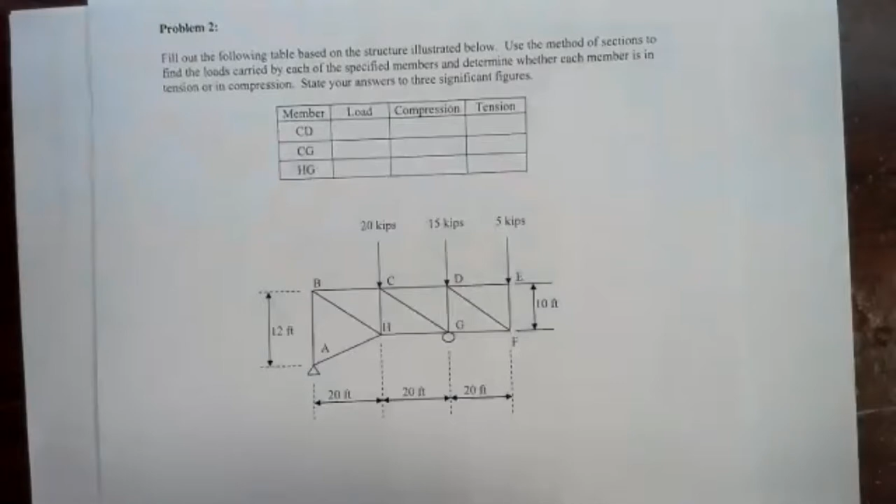It's not a bad idea to make a little mark through those, CD, CG, and HG, and figure out whether they're in tension or compression. So find out the load. We have something very specific here. It tells us to state our answers to 3 significant figures. So right away, that's a clue as to how many digits to round off to in our normal calculations. So as we're doing our calculations, we're going to want to keep 2 sig figs more than what we need in the end. So we'll keep 5 sig figs through the problem. So that's the problem to work with.

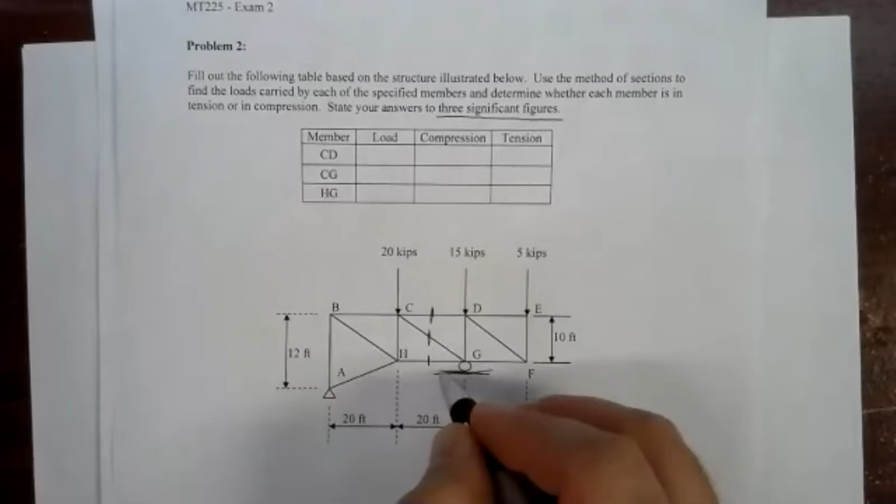Now, as you're aware at this point, I like to throw in problems that look a little bit different, but that are treated by the same exact methods we're already familiar with. The thing that looks a little bit different here, something we really haven't seen before, is that apparently the supports are on different levels. And that's okay. We could have a kind of a step or something like that here that this is on. That doesn't really change how we do the analysis of the problem. We can assume those supports are sitting on some sort of ground level or some sort of ground support. Doesn't change anything about how we do the problem.

So let's go ahead and start with the external problem. We need to find our reaction forces at A and G. So we'll start that with a free body diagram. So free body diagram, it's going to look something like this. Scale might not be quite right, but it's close enough to get the point across. So we've got joint A down here, then we've got B, C, D, and E, G, and H.

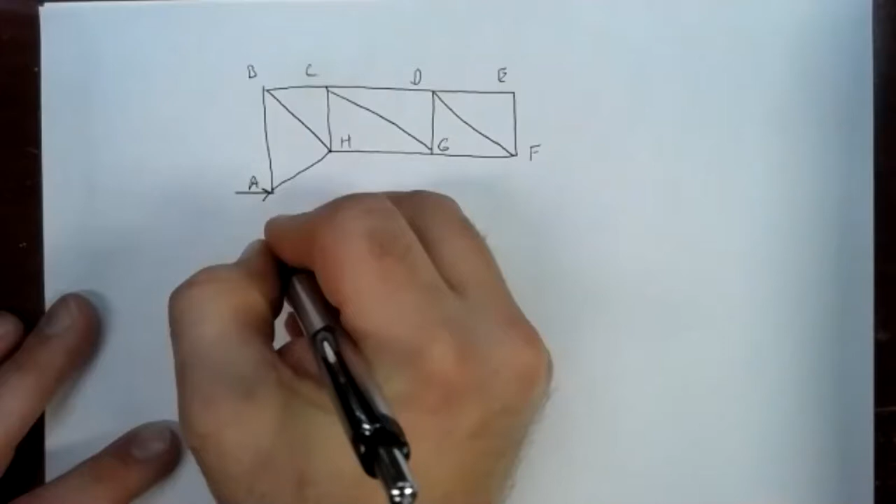We've got a pinned support down here at A, so that means we're going to replace it with 2 forces, RAY and RAX. G is a roller support, so we're going to replace that with a single vertical support, RGY. Then we've got these other external forces: 5 kips over there, 15 kips here, and 20 kips there. No other forces involved. We had a 10-foot distance here. This whole thing overall is 12 feet. And then each bay is 20 feet. So yeah, the scale is a little bit off, but we'll figure it out here.

So we start out our external problem with our sum of forces in the x direction. The only force we've got in the x direction is RAX, and that's equal to 0. So we automatically know RAX isn't there. Sum of forces in the y direction, we've got a positive RAY, we've got a positive RGY, and then we've got all these forces pushing down. We've got a negative 20, negative 15, and negative 5.

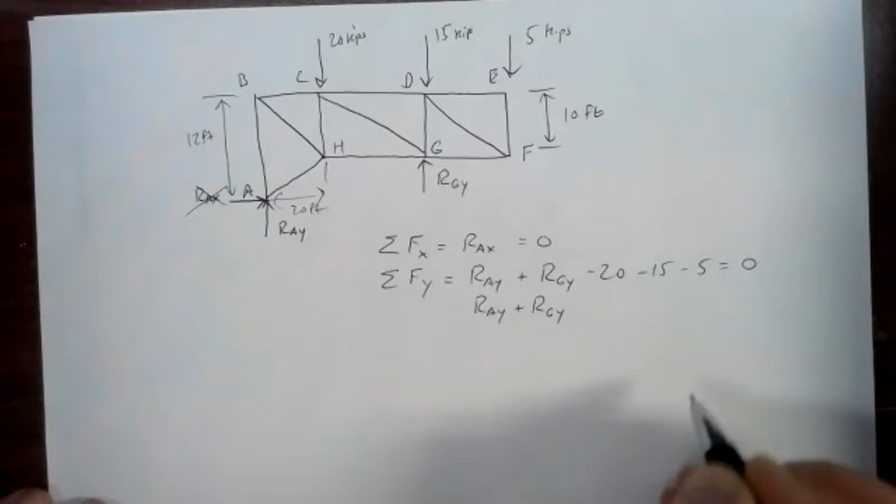So that's got to be equal to 0 if this whole thing's in equilibrium. If we simplify that down, we've got RAY plus RGY minus 20 minus 15 minus 5, a negative 40. So we have RAY plus RGY minus 40 is 0.

Now we need moments, and we need to pick a pivot point. Our traditional pivot point here, picking point A, ought to work with no problem. So we'll pick A as our pivot point. That means RAY will not have a moment, but all the other forces that are still there will: RGY, the 5 kip, the 15 kip, and the 20 kip force. All of those have an arm, the distance between the pivot point and the line of action of the force.

Working left to right, let's take that 20 kip force first. That 20 kips is 20 feet away, so we have 20 times 20. If we're pinned at A and pushing down at C, that'll cause a clockwise rotation. From our coordinate system, counterclockwise moments are positive, so clockwise moments are negative.

We've got our 15 kip force. That's 40 feet away, it's 2 bays away. So we've got 40 times 15. Pushing down at D, that's still going to cause a clockwise rotation about A, so that's negative.

We've got 5 kips, 60 feet away. That's also going to be negative. Pushing down at E will cause a clockwise rotation.

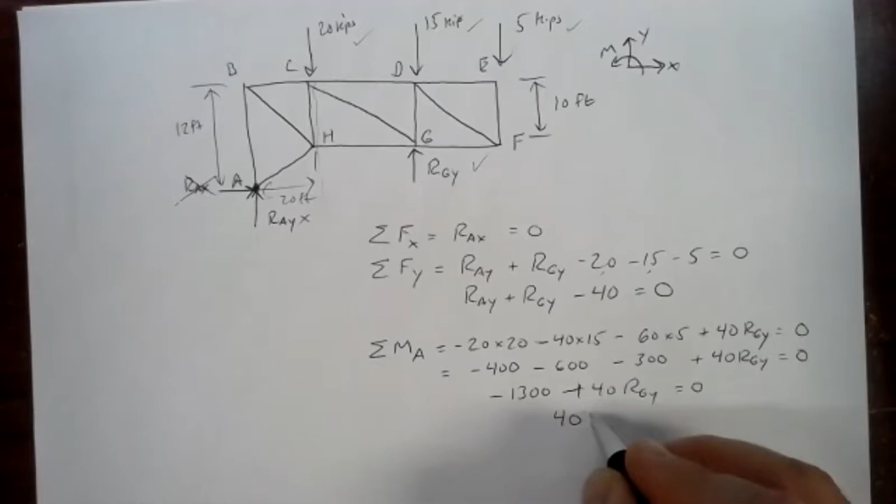40 RGY equals 0. Add 1,300 to both sides, and we have 40 RGY equals 1,300. Divide both sides by 40, and RGY equals 32.5. Since all of our forces were in units of kips, we have 32.5 kips. So that's what RGY is pushing up with.

Seems reasonable. It's on the same kind of order as our applied forces, 20 kips, 15 kips. We've got 40 kips pushing down, so it makes sense we'd have something around that pushing back up, since most of them are concentrated pretty close to where G is.

To figure out A, we can go back into our y direction equation. We have RAY plus 32.5 minus 40 equals 0. So that will tell us that RAY must equal 7.5 kips, since RAY plus RGY, the forces pushing up, need to equal the forces pushing down. So 32.5 kips plus that 7.5 kips gives us the 40 that we need.

So those are our reactions. That's the external problem, first step in doing the method of sections.

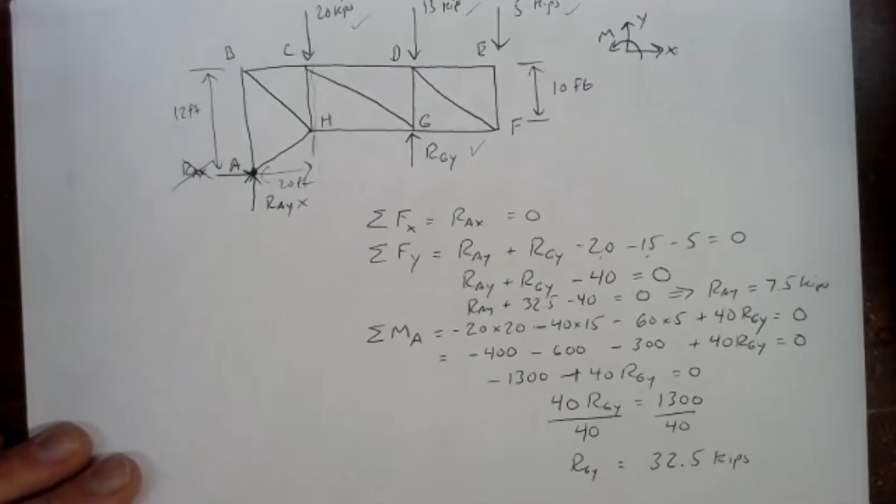If we go back over to the picture, now that we know our reaction forces, we have to decide how we're going to close this loop. We're going to be able to cut through all three members that we want in one pass, in one cut. But we've got to close that cut either to the right or to the left. Either way can work, either way is fine, either way should give you the same answer. If you do all the math right, it has to give you the same answer. It can't depend on how you solve the problem.

If we close to the right, we're going to be dealing with this 15 kip force, the 5 kip force, and RGY. If we close off to the left, we're only dealing with two forces, the 20 kip force and RAY. So closing off to the left seems to be a little bit easier here, just a little bit, it's marginal.

So that little section of the truss that we're cutting out is going to look something like this. If we draw a picture of the part inside, we've got that section from A to B, we've got A to H, we've got B to C, and we've got C to H.

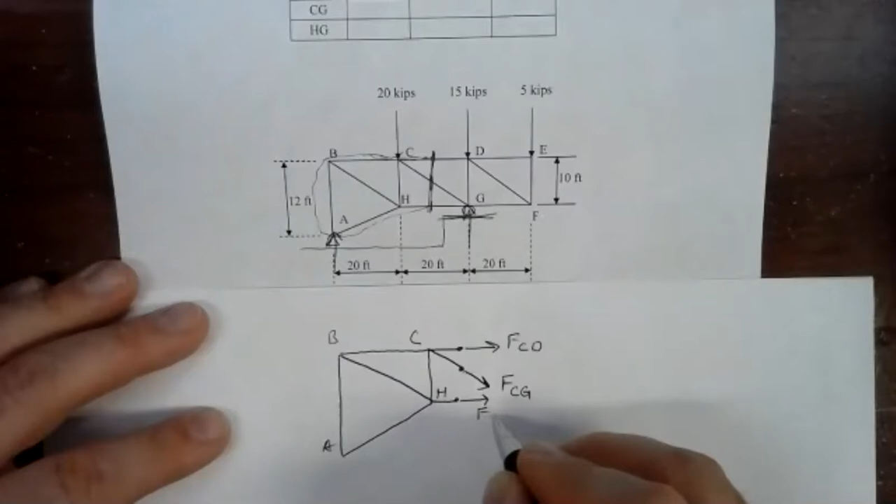And then we've got where we cut through GH, FGH. We're going to need an angle, we need that angle there. But fortunately, that's not too hard to find.

If we go back up to our picture, each of these triangles is 10 feet high and 20 feet wide. So since we're looking for this angle right here, opposite over adjacent, we do inverse tangent of 10 over 20, opposite over adjacent.

So we do inverse tangent, and we get 26.565 degrees. So that's the angle there.

26.565 degrees. One of the recurring problems I've seen in looking at the homework is people messing up sine and cosine when you're looking at opposite and adjacent. Make sure you're looking at that carefully.

If you decided you wanted to work with this angle down here, that's fine, but you're going to get the complement to 26.565. You'll get 63.435. And it's fine to work with that. Just be aware that when you want your y components, you're going to need to use cosine, because the cosine goes with the adjacent side, and the adjacent side to that 63.435 angle is the y side.

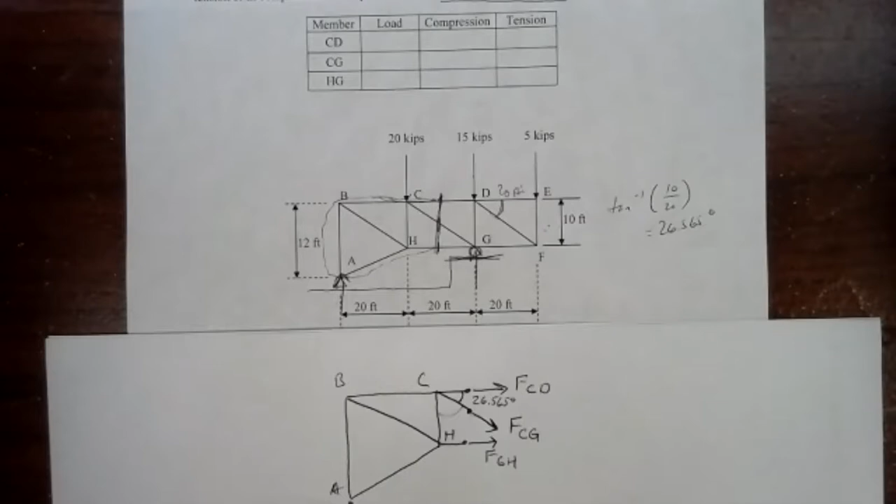We've got our force here also. We've got that 7.5 kips right there at A. So there's our free body diagram of the part of the truss isolated by our bubble. Don't forget the 20 kip force here. Always a good idea to go back before you do your analysis and make sure you've caught all the forces.

So I've got that 20 kip force at C. I've got the 7.5 kip force at A, my reaction. No RAX because there were no side loads. And I've got my 3 unknown forces. So it looks like we're good to go.

So let's do our sum of forces in the x direction. We've got all of FCD to the right, and to the right is positive, up is positive, and counterclockwise moments are positive. So we have positive FCD. We've got all of FGH, and we've got a piece of FCG.

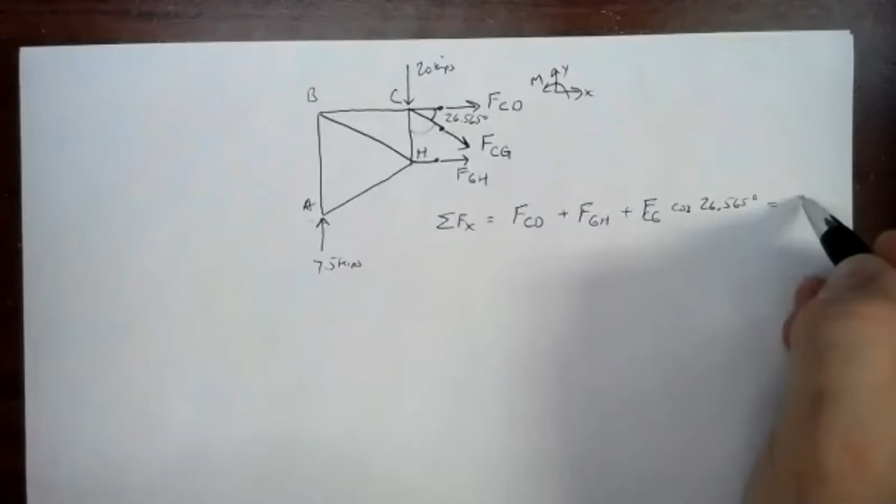Now, since I've decided I'm going to use this 26.565 degree angle, and the x component is adjacent to that, adjacent's going to go with cosine. So I'll have FCG cosine 26.565 degrees. And that's pulling to the right, the x component's to the right, so it's positive. No other x components involved, so that's all we've got for our x component equation.

For the y direction, we've got a positive 7.5 kips from our reaction at A. We've got a negative 20 kips from the applied load at C. And then we've got the piece of FCG pulling down. And since that's the opposite side, that's going to go with sine. And since it's down, it's going to be negative. So negative FCG sine 26.565 degrees. That's all I've got in the y direction.

And then we've got our pivot point. We've got to do our sum of moments about a point. And the easiest point to pick in this case is going to be point C, because it's going to knock out FCG specifically, because that one's the one that's got a hard moment to figure out about any of the other points. Point C is about the only place where we've got a nice simple moment for FCG, that moment being 0.

It'll also knock out FCD and that 20 kip force. The only forces that will have moments will be FGH and the 7.5 kip force.

So if we use joint C as our pivot point, FGH has an arm. According to our drawing, if we go back to that, FGH is down here, the pivot point's there, the line of action's down here, the arm is that distance between the pivot point and the line of action of the force. That's 10 feet. So we have 10 FGH. If we're pinned at C and we pull to the right at H, that's a counterclockwise moment, so that's positive.

Then we've got joint A, which is at 7.5 kips. Joint A has an arm that is 20 feet away from C. If we go back to the picture, we can see that here. Right here is A. The line of action of A is right there.

Pivot point's right here. I'm still seeing a little bit of confusion with that, with some of the forces. So if you got that wrong on your homework, got something wrong with an arm, make sure you're paying very close attention to that. It's an easy way to make a small mistake that just messes up the whole problem.

So got to get those arms right. Each bay is 20 feet wide. So A, the line of action of A is 20 feet away from C. So we've got 20 times 7.5. And if we're pinned at C and we push up at A, that'd be a clockwise rotation, so negative.

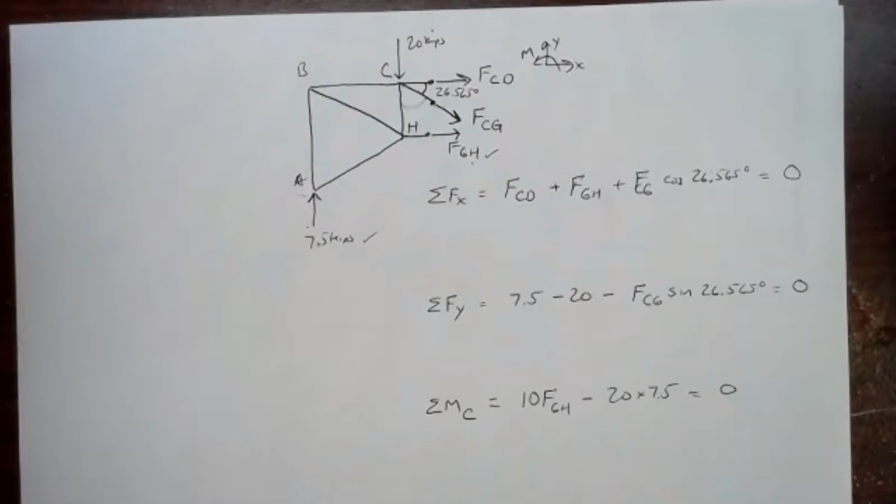Now, as it usually works out, the moment equation's easy to solve. We've got 20 times 7.5, that'll be 150. So we get 10 FGH minus 150 equals 0. Add 150 to both sides, and we have 10 FGH is 150. Divide both sides by 10, and FGH is 15.

So member GH came out to be 15 kips and came out positive, which means our assumed direction is correct. The rest of the truss really does pull on member GH. That means it's putting member GH into tension.

So if we go back to the chart, we can fill that in. We know we're in tension, and we've got 15 kips.

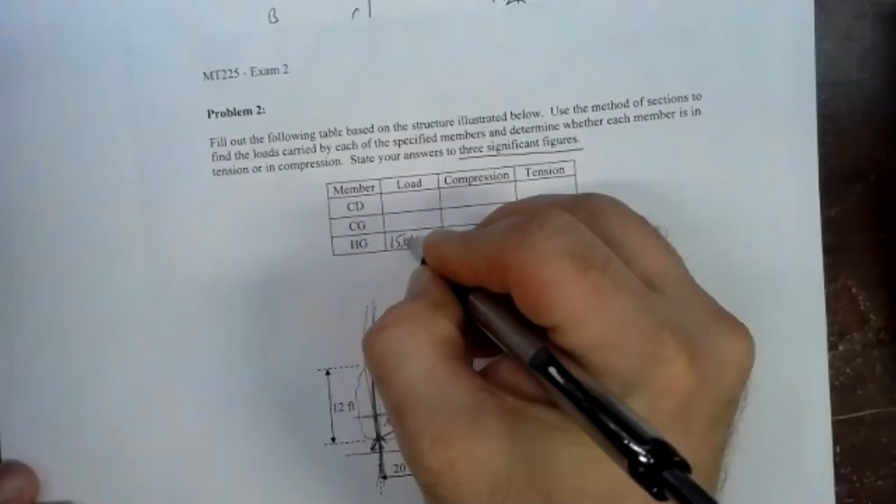Now, we can be careful here because that's the final answer. For that, we need that to 3 sig figs. To make a 15 into 3 sig figs, we do 15.0. It's kind of picky to do that because we really haven't done any round off at all. This is actually an exact answer up to this point, but to meet the objective of the problem, we'd write it as 15.0 kips.

And be careful, the ones we write up on our own, I usually put the units up in the header of the table. That's not there, so make sure you put the units in or make a note somewhere, cross that out, and write loads in kips or whatever you need to do to communicate the right units. If you just leave it blank, I'm going to take off points. So 15.0 kips in tension.

So we got 15 kips there for GH. We go up to the y direction equation. We can solve that, and we can simplify it a little bit here first. 7.5 minus 20, we've got negative 12.5 minus FCG sine of 26.565 degrees. That's equal to 0.

If we add 12.5 to both sides, we'll get negative FCG times the sine is positive 12.5. Then we divide both sides by negative sine of 26.565 degrees. The negative will cancel out the negative sign there, giving us a positive FCG. That's what we're always solving for, and the signs will cancel each other out. So be careful to watch those sign signs, because those can cause problems for you too.

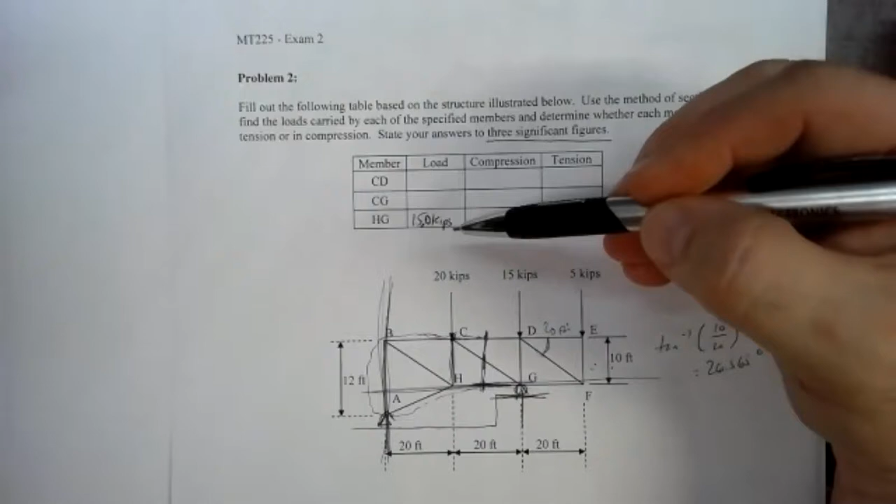Now, that being said, when you look at filling in your table, we never put negative values in that load column. The load is an absolute quantity, it's how much load is there. We use up any negative signs there are when we interpret tension or compression. So that it's negative tells us that member CG is in compression.

Remember, in method of sections, as long as you set it up the way that I've shown you, if the answer comes out positive, it's tension, and if it comes out negative, it's compression. So tension and compression are as simple as interpreting the sign when you are working with method of sections. We all know method of joints is a little more tricky.

We can fill in the table here, and we can go ahead and round. As long as we don't use the rounded value in our final calculation here, we can go ahead and round this to 3 sig figs. And to 3 sig figs, this would be 28.0. So 28.0 kips filled into the table.

So finally, we can go and do our x direction equation. We can fill in what we know, including the signs. The value of FCG is a negative number. You have to plug that in to the equation, including the sign. We can interpret the sign away when we fill out the table, but when we're solving equations, we've got to include that sign. We can't just drop it.

So let's fill in what we know here. We don't know FCD. FGH is a positive 15 kips. FCG is a negative 27.951 times cosine of 26.565 degrees. If we take 27.951 times the cosine of 26.565, we've got 25.

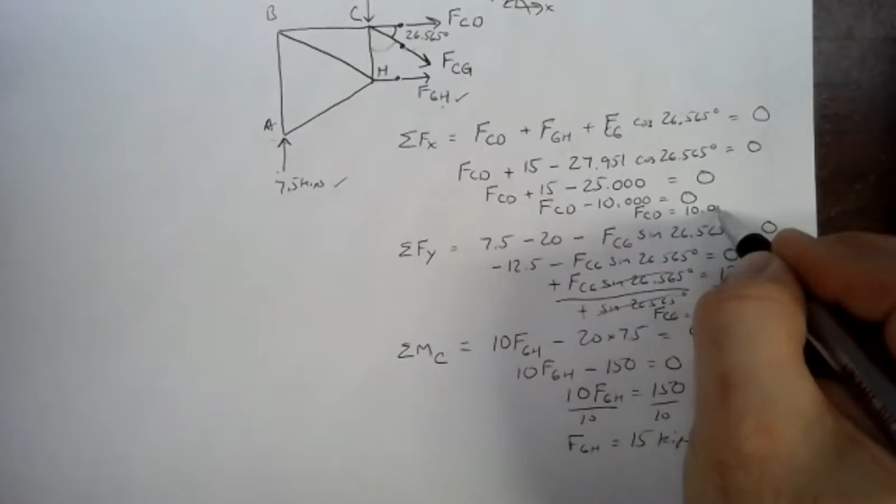So this is FCD plus 15 minus 25.000. 15 minus 25 is a negative 10. So we have FCD minus 10.000 equals 0. So if something minus 10.000 is 0, then that something must be 10.000. So FCD is a positive 10.000 kips. So that means that member CD is in tension.

So let's go over to the table here. Member CD, we can fill that in now, rounded to 3 sig figs. And that came in tension.

Is it acceptable if we just write kips over top of load? Yeah, anything that clearly communicates what your units are is fine by me. Okay, just making sure. About the only time I end up taking off points for units is when they're just not there at all, where there's just no indication of it. I even get pretty lenient on it when it's shown in the work, but you didn't put it in your final answer. As long as I could see it in the work, at least tells me you knew it at some point. But if they're just completely gone, then I can't do anything with that. Understood. But as long as it's clearly communicated.

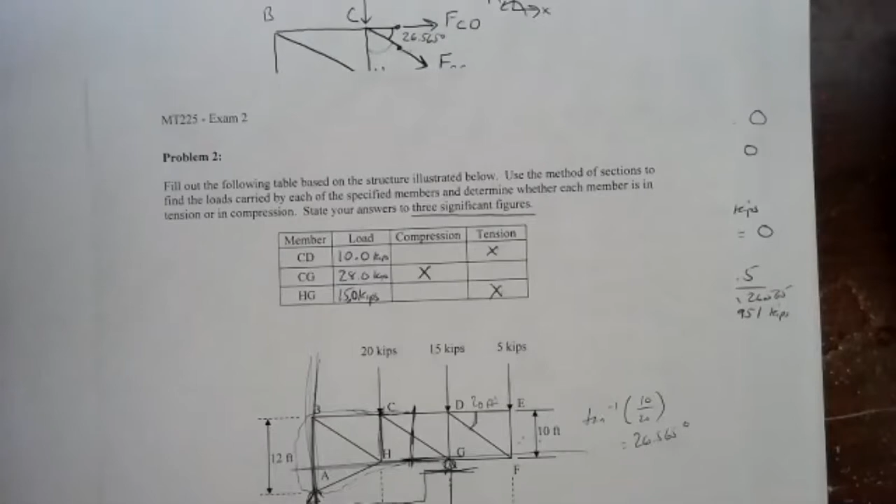So for our loads, we should always keep it positive, right? As long as we indicate which is tension and compression. Yep, the sign factors into tension and compression. The load is an absolute quantity. It's considered a magnitude. So in a sense, you could think about this as a vector representation, where compression or tension is telling you about direction, and the load is the magnitude. So the magnitudes of vectors are always positive. Okay. Makes sense there? Yep. All right, any questions on that one?

Now this one's got kind of a complex load on it, to be able to get essentially both the top and bottom to be in tension like that, CD and GH. You've got some load over here that's trying to bend the part of the truss here between A and G, trying to bend that down. So that's going to stretch out GH, but it would tend to put CD into compression. But then you've got this 5 kip load over here, which is trying to bend everything this way, trying to stretch out the top. And it's far enough away that it can actually win and be able to turn that top from compression to tension, but not really have an effect on what's going on down here.

So this isn't a pure bending state. In a pure bending state, you'd either have just tension on the top and just compression on the bottom, or vice versa. Here we've got something that's kind of twisted around, where it's got some bending in one direction on one part, so it's kind of bending like this over here, but it's bending like this over here. It's kind of a strange load on the system, so it's not the easiest one to try to just guess the tension and compression status on.

All right, any other questions on exam 2?

So is that pretty typical for the exam to have just 3 questions? Yeah, sometimes I've gone with 4, where I've done kind of a method of joints, method of sections, frames, and then kind of like student's choice. So here's a truss, do it however you need to. But that's been pretty rare. So I think 3 is pretty standard here, and you can expect the lines that they're going to go along. Method of joints, method of sections, and a frame problem.

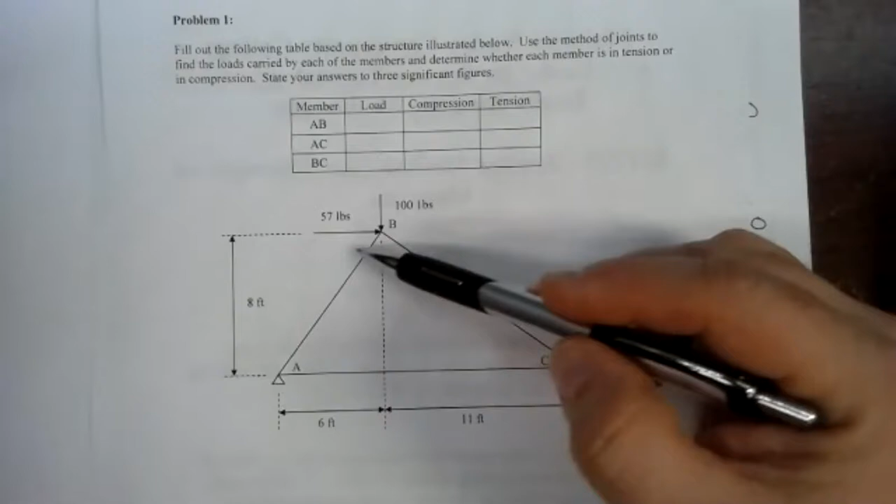Do you think it's beneficial for us to just go over all 3 then? It's probably not a bad idea if you've got questions on them. I mean, if everyone here is feeling perfectly fine with method of joints, this one is a typical 3-member method of joints problem. About the only thing I think that would immediately trip people up, or that I'd expect to see errors on, would be people forgetting about this 57-pound force in their moment equation. They're used to thinking about those gravity loads, but those side loads, like this could be a wind load or something like that on a roof truss. I mean, I could certainly do them, I'll run them through if you want. But if everyone's feeling perfectly comfortable with something, I'd rather spend time on things that you're not feeling as comfortable with.

But if no one has any other suggestions, I'd be fine with that. I'm good with whatever. All right, hey Tom, go ahead.

All right, let me scrap my pages here and get to some fresh scrap paper. There we go. All right, so here we've got problem number 1.

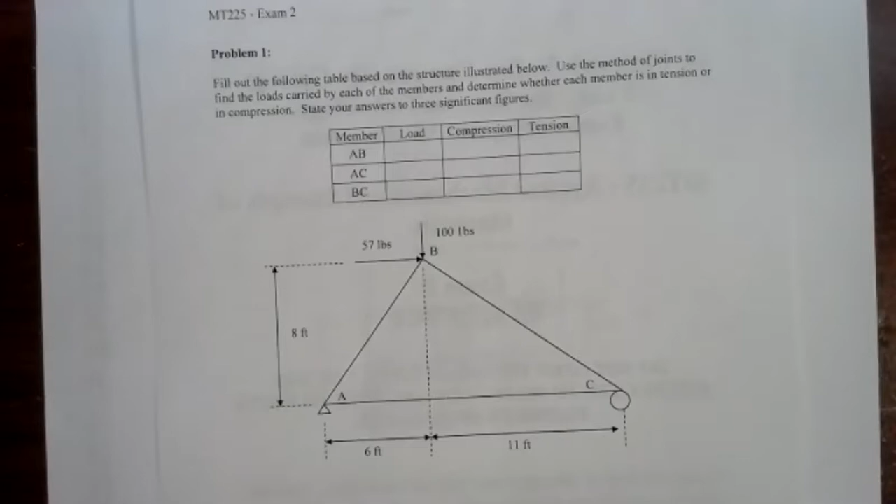By the way, you can probably expect a pretty reasonably equal distribution of points on the exam. If there are 3 questions, chances are I'd probably go 40, 40, and 20. I'd probably weight the method of joints and method of sections heavier because those are really the most important concepts to be getting out of the class. The frame would probably be weighted a little bit lighter. That'd be my first instinct on it. So somewhere in that neighborhood, 40 points for each of those, I forget what it is. You can check in the solutions, as those are posted for exam 2, for the old exam 2, and see what my point breakdown was. But that'd be pretty typical, at least from what I normally would do.

So let's take a look at this one here. We've got a 3-member truss. It says to use the method of joints, which you really don't have a lot of choice of. Try doing method of sections on one of these sometime, on the 3-member truss, and you'll see pretty quickly why you don't end up doing method of sections on these, because it breaks down into method of joints. When you can't cut through 3 members in one cut, you're just doing method of joints. So you end up with basically the same problem. So we may as well use the method of joints on this.

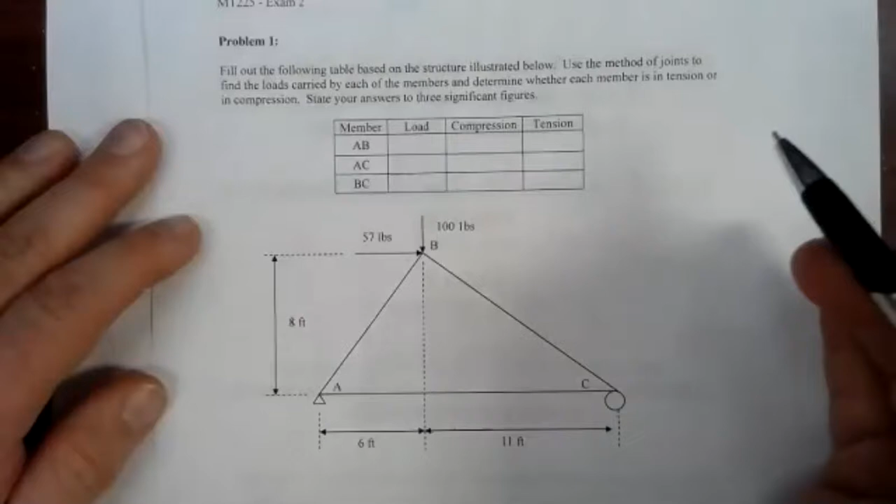Determine whether each member is in tension or compression, and state answers to 3 sig figs. So same procedure as with method of sections. First, we've got to do the external problem. So let's sketch our free body diagram.

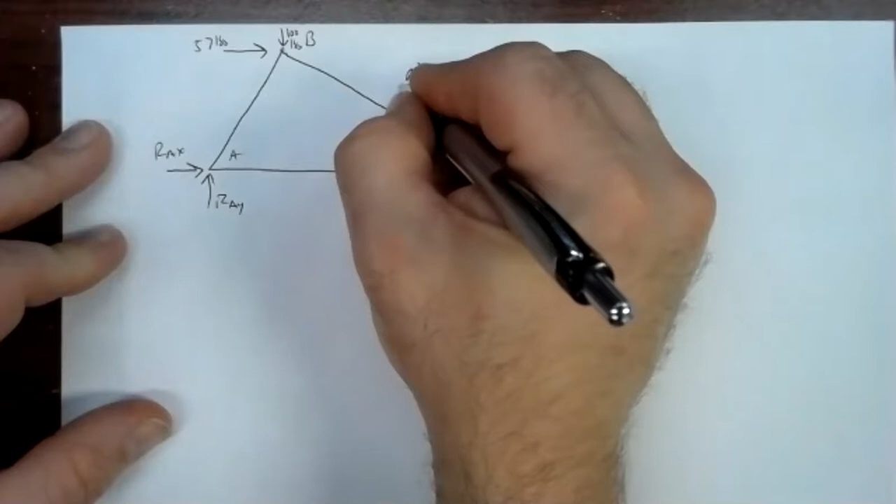So up here at joint B, we've got a 57-pound force and a 100-pound force. 57-pound force to the right and a 100-pound force down. Joint A is a pinned support, so we can replace that with two forces, RAX and RAY. And then over here at joint C, we've got a roller, so vertical RCY. To the right is positive, up is positive, and counterclockwise moments are positive.

So we'll do our sum of forces in the x direction. We've got a positive RAX by assumption, and then we've got a positive 57-pound force. That's given to us. No other x direction forces, so that lets us make a solution right away. RAX is negative 57 pounds. So that means I guessed the wrong direction down here. I assumed RAX was to the right, but it's got to be to the left, which makes sense. We've got a force pushing to the right, so there's got to be something going to the left to counteract it. And we'll correct that when we draw our next free body diagram.

We'll do our sum of forces in the y direction. We've got a positive RAY, a positive RCY, and a negative 100. The best we can do with that is just add 100 to both sides and get the same y equation we normally get, which says that the two unknown forces pushing up had better total up to be the total forces pushing down. But we can't solve that yet, too many unknowns.

So then we'll take our sum of moments and we'll pick A as our pivot point. Sum of moments about A. RAX and RAY will not have a moment because they're both pushing on A. But RCY will have a moment, the 100-pound force will have a moment, and that 57-pound force, that troublemaker 57-pound force, will also have a moment. Anything that's got a line of action that doesn't pass through A, that's going to have a moment. So we're going to have three terms in our moment equation. Now, RCY, according to the drawing, is 17 feet away.

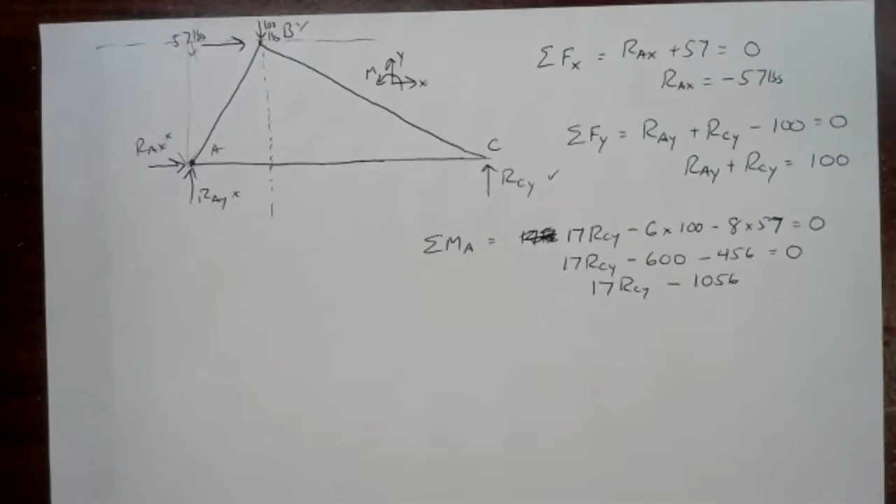Combining that together, we've got 17 RCY minus 1056 that equals 0. If we add 1056 to both sides, we have 17 RCY is 1056. Divide both sides by 17, and we get RCY is 62.118. The units here are pounds.

So we've got 62.118 pounds pushing up at C to support this structure. Knowing that, we can go over to our y direction equation.

We've got RAY plus 62.118 is equal to 100. Subtract 62.118 from both sides. We've got 100 minus 62.118, and that gives us 37.882. So RAY is 37.882, also pounds.

So there we've got our reactions nailed down. Got to make sure to translate all of them over. Don't ignore that X direction. Another very common mistake I see people make is they get so used to doing problems that just have gravity loads in them that they completely forget about RAX and drop it out of the problem. That's going to mess things up. So we've got to have all three of those reaction forces carried over into our intermediate free body diagram.

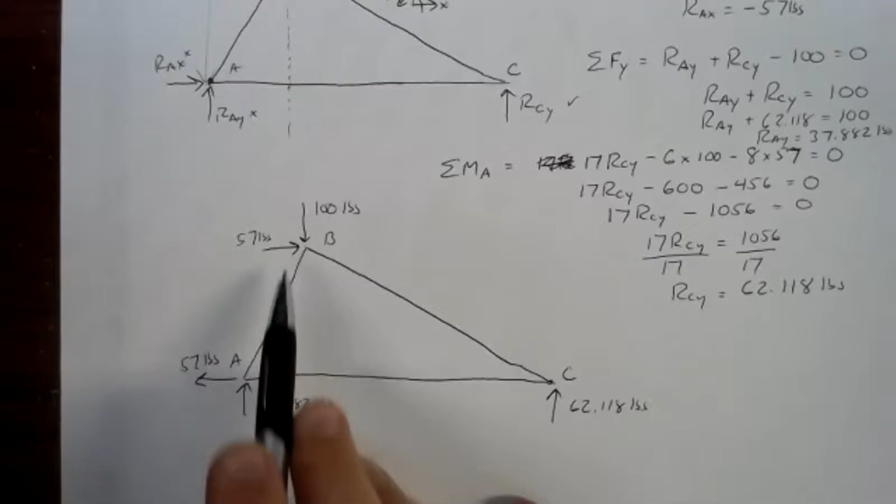In fact, we do this kind of thing all the time where we use forces in kind of strange directions to shift a load. Those of you who might be a little more familiar with towing vehicles might have heard of something called a weight distribution hitch. It works in a very similar way, where we're using a side load to shift essentially how that tongue load is balanced out on the vehicle.

So let's go into the method of joints here. It's almost always a good idea in these kinds of problems to work on these support joints, mostly because we've got this unknown that's horizontal. Working with unknowns at angles means we're taking sines and cosines of unknowns, and that makes the algebra more complex. Having one of those is bad enough. We want to avoid, if we possibly can, working on a joint where we have two unknowns with angles involved, because we'd be taking sines and cosines of different angles, and that's just ugly.

In 2 dimensions, we should always be able to find, unless I were to go and create some really nasty structure, some joints that are easier to work than others. So it's up to us here whether we work at joint A or joint C. If you remember the rule I gave you a little earlier, when you're working with a method of joints problem, you're always going to have to solve one fewer joint than the number you've got.

Here we've got 3 joints. I'm going to have to work with 2 of them. And so I don't want to work with B, so that means I'm going to work A and C. So just out of habit, I'm going to work A first. C might be a little bit easier, just because it lacks that other side force, but since we have to work both of them anyway, we may as well. So let's go over to joint A.

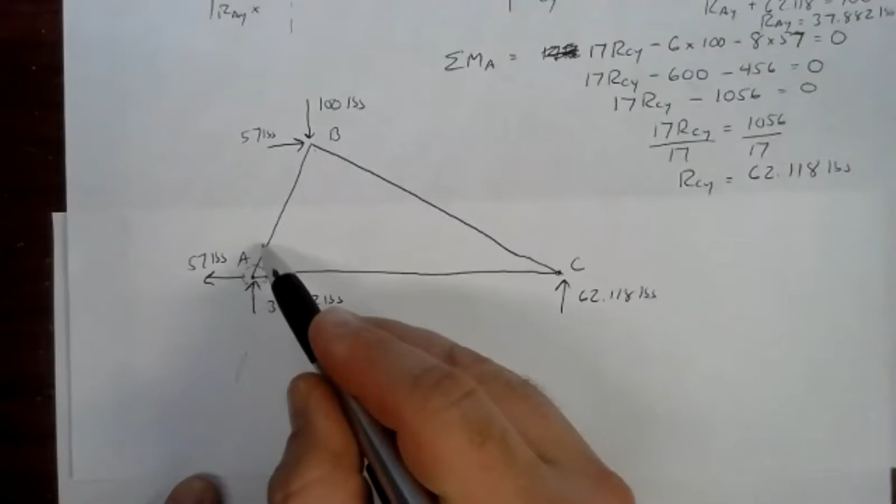We're going to draw the free body diagram at joint A to make sure I don't make a stupid mistake and ignore a force. I'm going to draw my little bubble around A and make sure I count up how many forces are acting there. I've got 4 forces: the 2 reaction forces, and these 2 unknown forces. So I should have 4 forces in my free body diagram.

I always like to draw the forces as if they're pulling. So rather than pushing up with this 37.882 pounds of force, I'm going to pull up with 37.882. I always draw my known forces in first. That makes it a little easier to figure out reasonable directions to draw my unknown forces. So those are my 2 known forces.

Then I've got to fill in values for this unknown force on the joint due to member AB, and the unknown force on the joint due to member AC. Now it makes sense here to draw the force due to AC pulling to the right. It's just easier to draw that way rather than drawing it on top of the 57-pound force and run the risk of losing it. When you've got two arrows drawn on top of each other, they often start to look like one arrow, and then you make mistakes pretty easily.

That also gives me a better idea of where to put AB. If I drew AB pulling up and to the right, that wouldn't be reasonable because there'd be no forces down. And to be in equilibrium, for every force to the right, there's got to be a force to the left. For every force up, there's got to be a force down. So here we've got member AB's force. I'm going to draw that as down and to the left. And that should be, I've drawn it kind of not quite at the right angle here, but I've got the down to the left going here.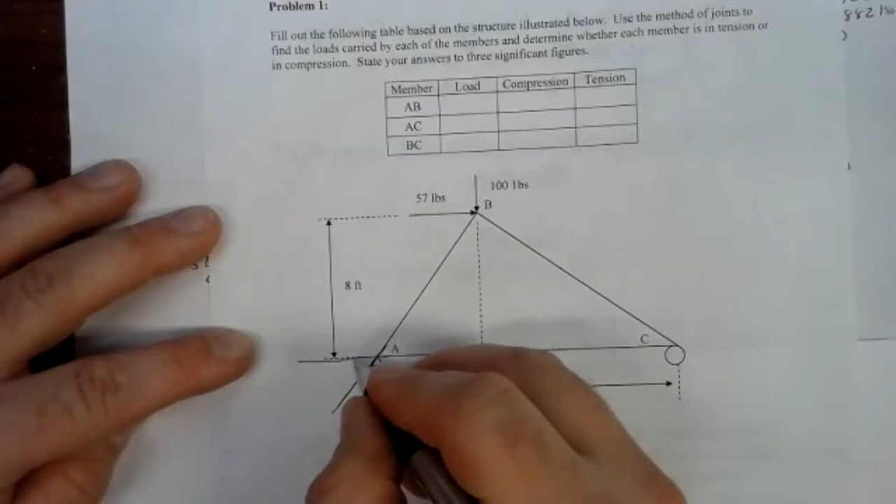We need the angle, and you've got to be careful with these angles. Sometimes it'll help to go back to the drawing, maybe even back to your original drawing, and sketch out what those angles are. There's the extended line for member AB and for member AC. That angle right there, the one to horizontal, is the one that I want. Fortunately, those two angles are the same. We call them vertical angles when they are across the X that way, and they are across an X. That is, those two angles have to be equal.

Well, we can get that angle pretty easily from this triangle. We've got 6 feet there, we've got 8 feet there. So our angle is going to be the inverse tangent of opposite over adjacent, 8/6.

There have been several times in a lot of the homework assignments and such that I saw people submit in quizzes where people have gotten the complement. They've gotten the angle on the other side, gotten the angle to vertical. And that'll work as long as you use it in the right place. But what I most often see is the angle drawn to horizontal, but the angle calculated to vertical. That's usually flipping over the order here. So pick the angle you're working with. Opposite over adjacent will give you the angle.

So inverse tangent, that's 53.130. So that's my angle here, 53.130 degrees. So there's my free body diagram for joint A.

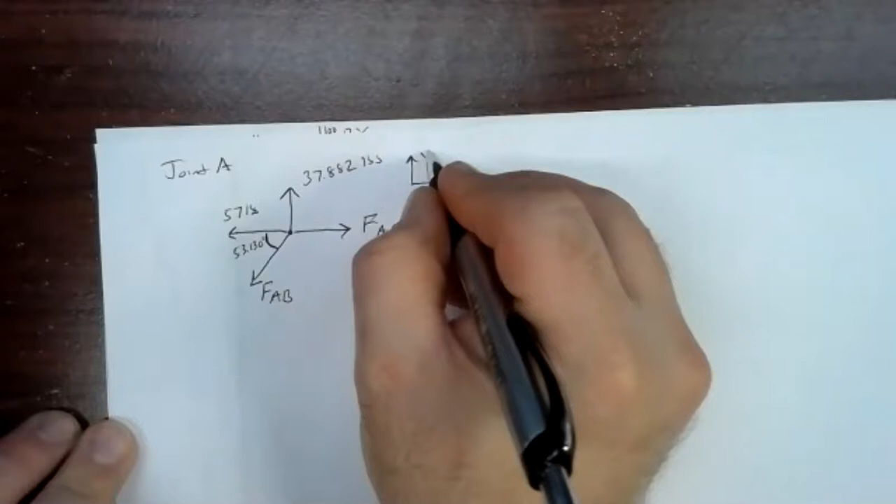And of course, remember our directions: to the right is positive, up is positive. And we don't need moments here because none of these forces have a moment. This is a concurrent force system. All the forces push or pull on a single point. So we're only going to get two equations: the sum of forces in the x direction and the sum of forces in the y direction.

If we take our sum of forces in the x direction, we've got FAC to the right, so that's positive. We've got that 57 to the left, and then we catch a piece of FAB. We catch the adjacent piece, the part next to the angle. Adjacent goes with cosine, and that's pulling to the left, so it's negative FAB cosine of 53.130 degrees.

And then we can do our sum of forces in the y direction. We've got a positive 37.882 pounds, and then we've got the downward piece of FAB. That's the opposite side, and opposite goes with sine, so we have minus FAB sine of 53.130 degrees. So there we go, our two equations at joint A.

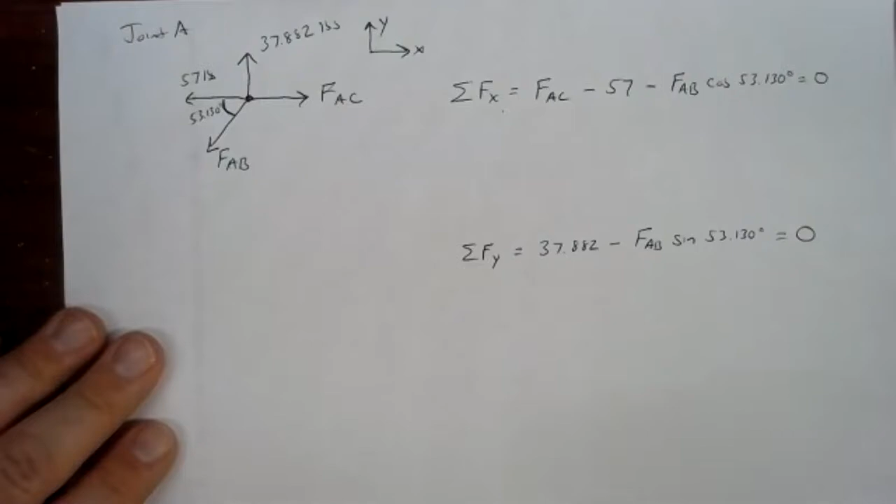We can solve the y direction equation right away. If we subtract that 37.882 from both sides, we have negative FAB sine of 53.130 degrees equals negative 37.882. And remember, when you divide by a negative number, you've got a negative coefficient, you divide by that negative to cancel it out. So we divide by negative sine of 53.130.

The negatives cancel each other out, giving us a positive FAB, and the signs cancel on the left. So FAB equals a positive value, so we know something about our answer already. FAB came out positive, so our assumed direction is correct in the free body diagram. The value we get is 37.882 divided by the sine of 53.130, and that's 47.353 pounds.

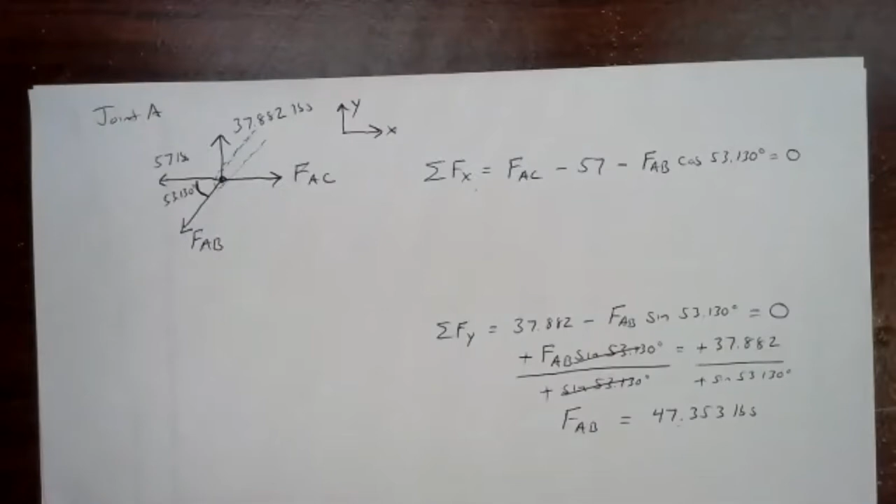So it came out positive, meaning our assumed direction is correct. We have to interpret that, knowing the direction is correct, whether that is tension or compression. If we compare back to our original drawing, joint A is right there. Member AB is up and to the right, but it's pushing joint A down and to the left. So member AB is shown in hidden lines, pushing joint A away. So we have to answer whether that's tension or compression.

Remember here we're looking at the joints. If a member is in tension, it's been stretched out, and its tendency is to try to shrink back to its original size. A member in tension tends to pull the joints inward. From the point of view of the joint, it feels pulled inward when the member is in tension. If a member is in compression, it's been squeezed down, and its tendency is to try to expand back out, so it pushes the joints away from the middle. That's compression.

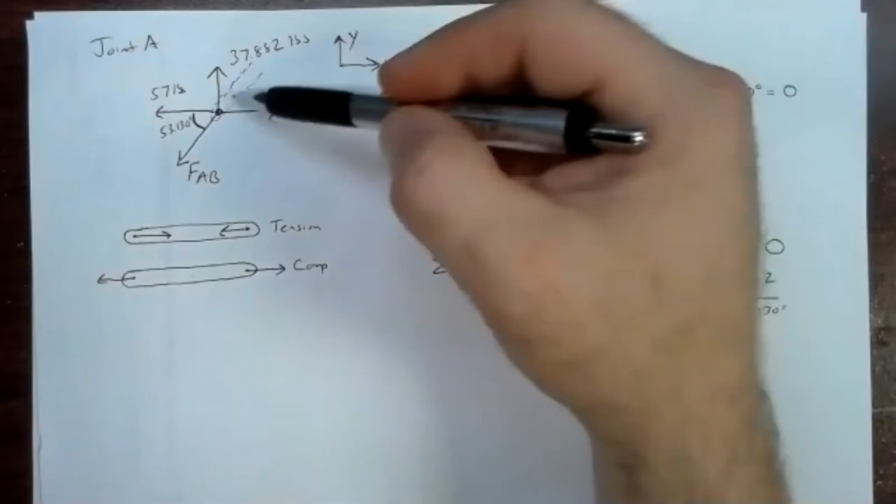So we can go over to our table and tabulate that answer. We can round it off to 3 sig figs, so that'd be 47.4. We're not going to use the rounded number in the calculations anymore, but 47.353 pounds.

And we've decided that's in compression, and it kind of makes sense that it's in compression. You've got a pretty good load pushing down here at the top, that's going to tend to squeeze member AB. The 57-pound force is going to try to stretch out AB, but it's not big enough, nor at a strong enough angle, to really help out and counteract the effect of that 100-pound force. The tension or compression here is less than we'd see without that 57-pound force.

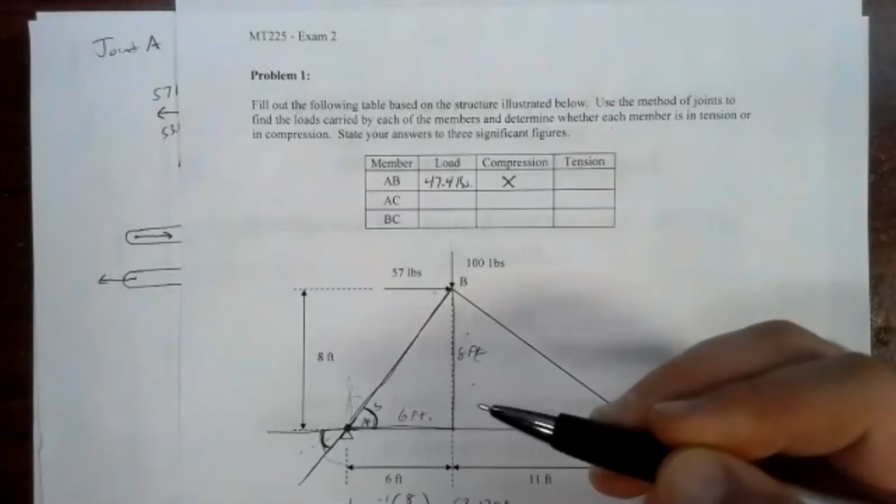Now that we know member AB, we can go and solve the x direction equation. We've got FAC minus 57 minus 47.353 cosine of 53.130 degrees. If we take that 47.353 and multiply it by the cosine of 53.130, we get 28.412.

So we have FAC minus 57 minus 28.412 equals 0. Combine that 57 in there, and we get FAC minus 85.412 equals 0. So FAC is 85.412 pounds.

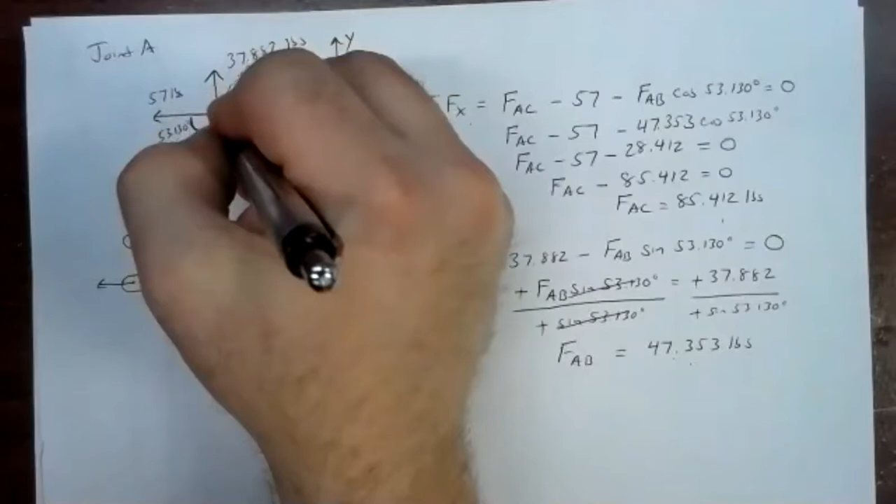The answer came out positive, so that tells us our assumed direction is correct. And if we go back to our drawing, member AC is to the right. So sketch that on top of the free body diagram, also in hidden lines, and it becomes clear that joint A is feeling pulled by member AC. When the joint is pulled by the member, that's tension. Looks just like what's going on over there. So member AC is in tension, so it carries 85.4 pounds

At joint C, we've got one known force. We've got our reaction at C, which was 62.118 pounds. We also have a known force. So here's joint C, draw our bubble around there.

We're going to expect 3 forces in our free body diagram, but we already know what's going on with member AC. Member AC is in tension, so it's the stretched out spring that's trying to return to its original size. It's pulling joint A that way, and it's going to pull joint C that way. So the load carried by member AC is going to pull joint C to the left, with 85.412 pounds of force. Don't make the mistake of going back to your table and reading out 85.4 pounds.

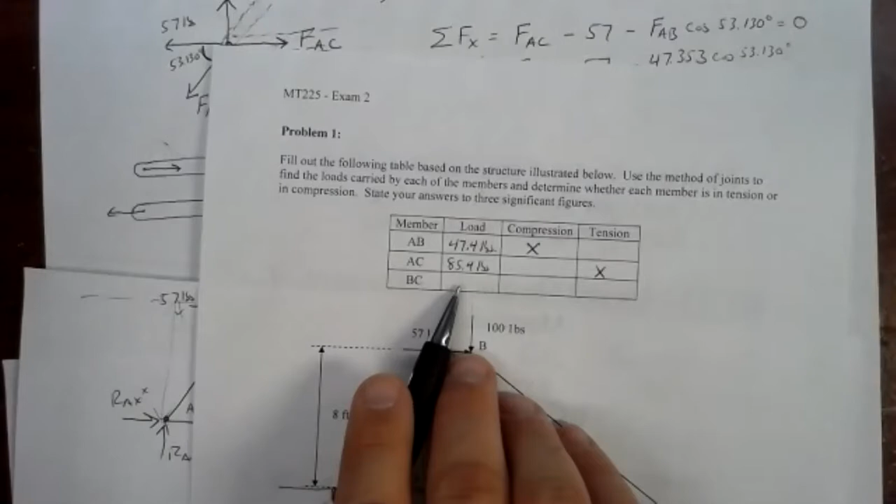That's been rounded to 3 sig figs. If we want our answer here for BC to be good to 5 sig figs, we can't use a value that's already rounded to 3 sig figs. So go to your full precision value, 85.412. So member AC pulls to the left with 85.412 pounds of force. And then we've got member BC.

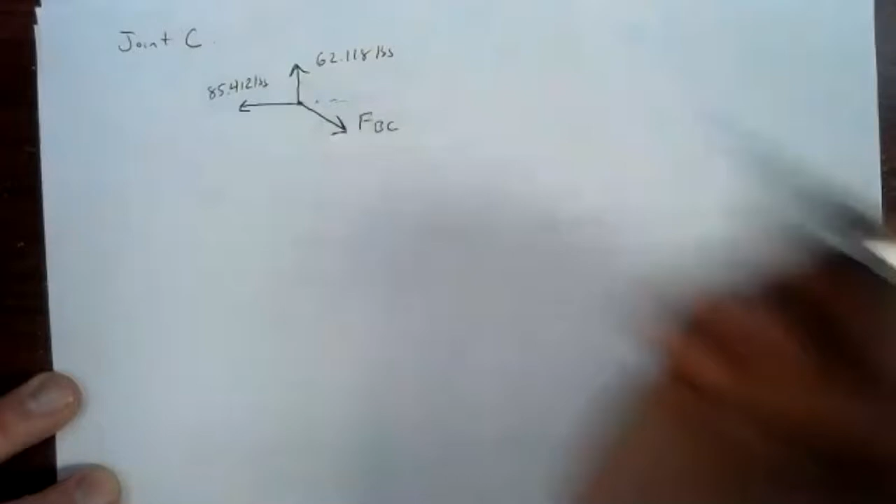Now it's pretty obvious from the directions involved here that the only way that it could make sense is to have joint C be pushed down and to the right. That's the only thing that looks like a tug of war, no one wins. So that's FBC. Now we're going to need an angle, and I generally go for the angles to horizontal when we're trying to construct those. So draw that little cross here.

That's the angle I'm looking for. It's the same as this angle right here. That angle is formed from a triangle that is 8 feet high and 11 feet on its base. So the angle is going to be the inverse tangent of opposite over adjacent, 8 over 11. So there we get 21.819 degrees.

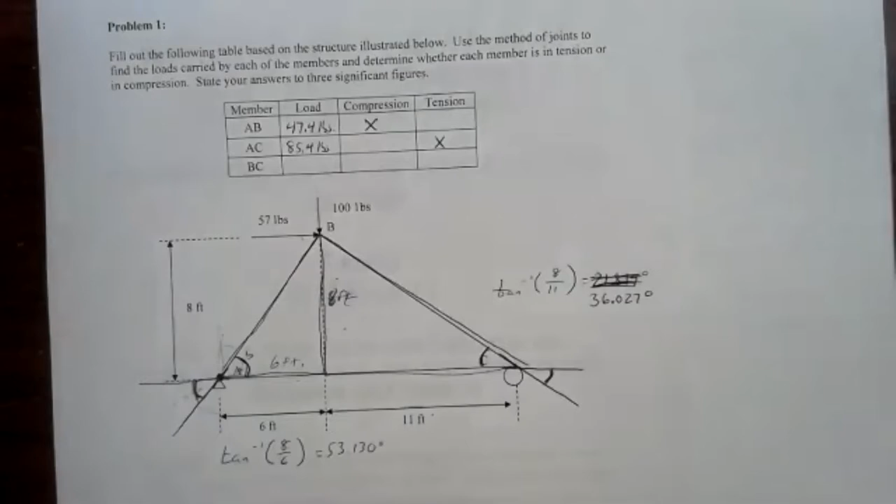Okay, I keyed something wrong there. Not sure what I did, but that number didn't sound right to me. So, 8 divided by 11, third try here, make sure we get the right value now. 36.027. That sounds a little bit better. What did I do? Key in 6. Yeah, that's what I did, I keyed in 6 instead of 8. This is 8 feet tall. So, 36.027 degrees.

Kind of crammed in there. All right, so we've got a concurrent force system. So all we've got are 2 equations, the sum of forces in the x direction and the sum of forces in the y direction. We're only going to need one of those because we've got only one unknown. I'm going to go with the y direction equation here because maybe I messed up and got the wrong value for member AC.

But I feel pretty confident about that 62.118, that came from my external problem. Didn't rely on any other calculations I did, so it's closer to the original information in the problem. It's a little more precise. It's not going to matter to 3 sig figs, but as long as I did my math correctly over here. If I made a mistake over here in figuring out AC, I can insulate myself a little bit from that by working with information that doesn't depend on it. In either case, if you've done your math correctly, you should end up with the right answer, so kind of by definition.

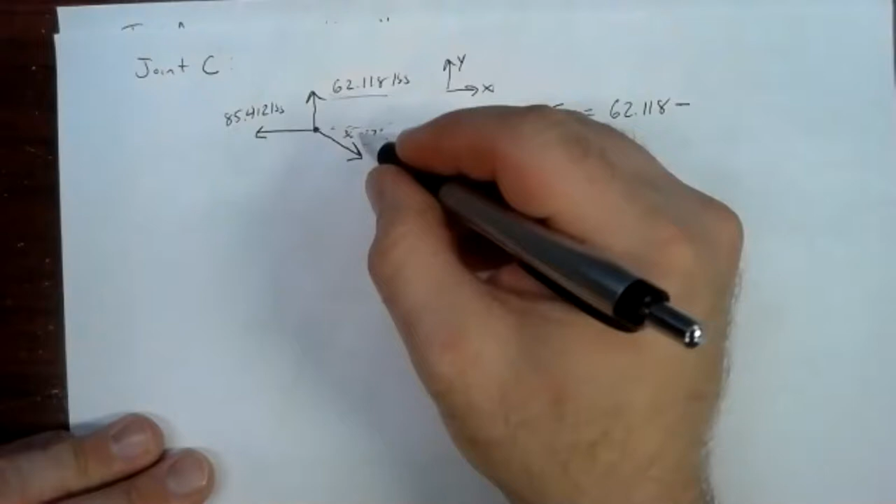So sum of forces in the y direction, we've got 62.118 up, and then we've got the vertical piece of FBC. That's the opposite side, so it's going to go with sine of minus FBC sine of 36.027 degrees. If we subtract 62.118 from both sides, I have negative FBC sine 36.027 degrees equals negative 62.118. Divide both sides by negative sine of 36.027 degrees.

And we'll get 62.118, 36.027 sine, divide, and we get FBC is a positive 105.61 pounds.

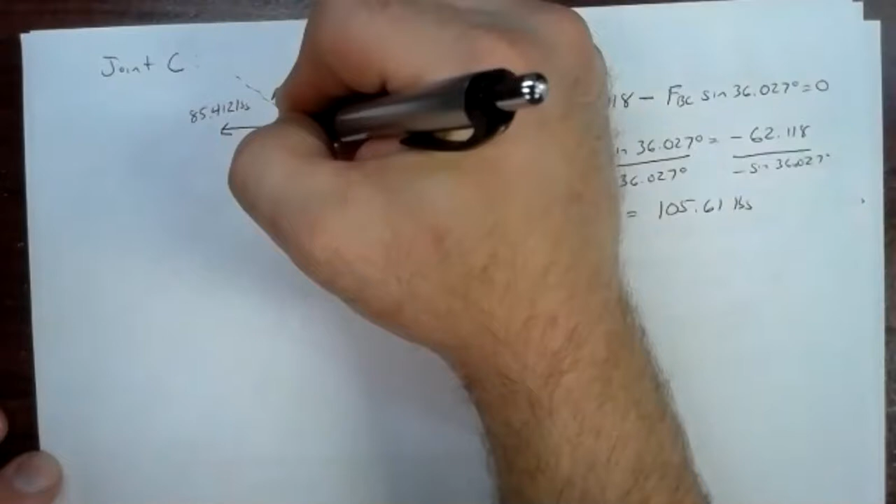105.61 pounds. Came out positive, so our assumed direction is correct. If we look at the original drawing, there's joint C. The member is up and to the left, so the member in the problem is right there. Joint C is being pushed away. That's compression.

So we have 105.61, or rounded to 3 sig figs, 106 pounds in compression. And if we look at the drawing, it kind of makes sense that it's in compression. Normally, that 100-pound force alone would put both AB and BC into compression. The 57-pound side load here at B tries to stretch out and relieves a little bit of the compression in AB, but it adds to the compression in BC. So it's shifting that load. That's how we end up with more load on joint C. It shifts some of the stress that's being carried by AB into BC. It makes AB less loaded while BC is more loaded.

And there we go, 3 sig figs, units are there. Pretty confident in the tension and compression. Any questions on that one?

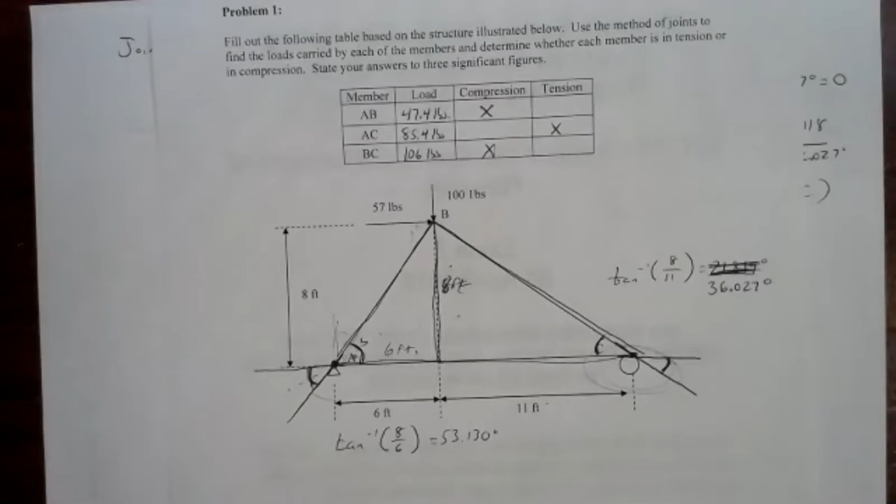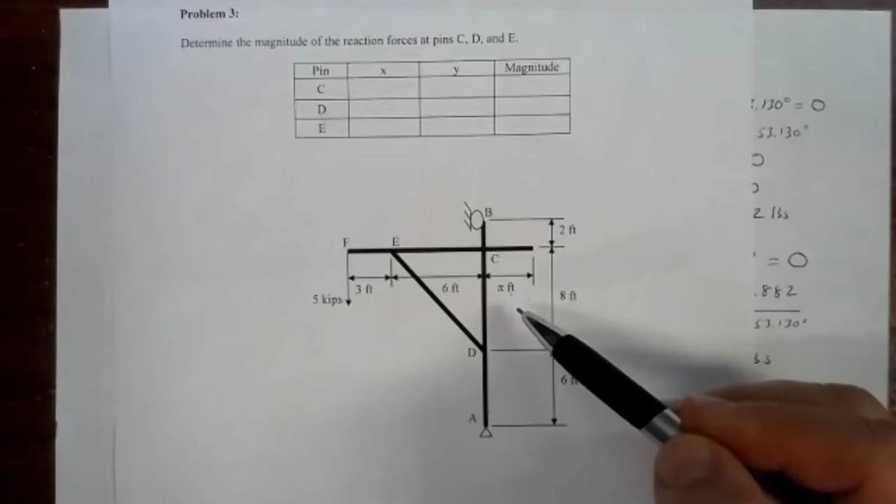That's not really the goofy thing here. The goofy thing is this distance right here, pi feet. It turns out you're not going to actually need this distance, so it doesn't really change anything, but I just kind of threw that in there. Not too many people ever call me out on that one either.

But if we look at the structure here, we've got a pin support at A, got that roller at B, and then we've got a 5,000 pound load, 5 kip load, hanging out here at the end. And we want to know what kind of stresses are on these 3 pins holding this structure together.

Now, in order to figure it out, we've actually got to find more than just those 3 pins. We're going to have to find out about our reactions up here too. But in order to have the right number of equations, we've got to have a number of equations consistent with our unknowns. The x and y components here of the forces at the pins are our unknowns.

We've got 6 missing pieces of information. The magnitude, remember, isn't an unknown, because once we know x and y, the magnitude is just the square root of x squared plus y squared. So it doesn't count as an unknown. So we've got 6 unknowns there, and we need 6 equations for that.

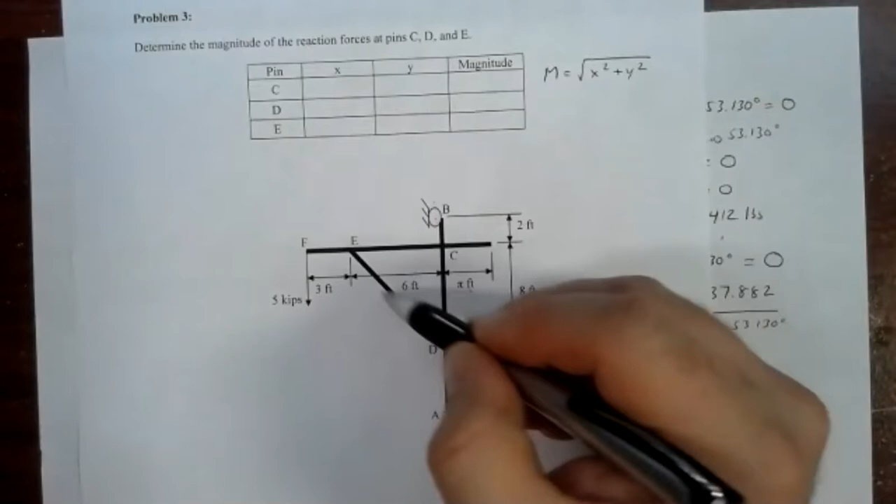And if we set it up right, we might be able to get away without finding the supports here. But that would mean we'd have to work with this slanted member. And as I've advised in the past, working with slanted members is usually kind of a pain. I'd prefer to work with horizontal and vertical members. Those almost always end up with easier equations to solve.

But to work with this vertical member here, I'm going to have to know what's going on at A and B. So I really need to figure out A and B also. So let's first do the external problem on this one.

So in doing the external problem, we need a free body diagram. And the free body diagram is going to look pretty close to the overall structure. We've got our 2 main members in this cross member. We've got our 5 kip force pulling down here. We've got this roller at B. And remember that the free body diagram removes the supports and replaces them with the forces that are supplied by those supports.

I'm going to assume the reaction at B in the x direction is to the right. Kind of makes sense, because if I pull down here, this thing's going to want to go to the left to fight it, to keep it from going to the left. I've got to push something to the right. Down here at the bottom at A, we had a pin, and pinned supports always have 2 reactions, RAX and RAY.

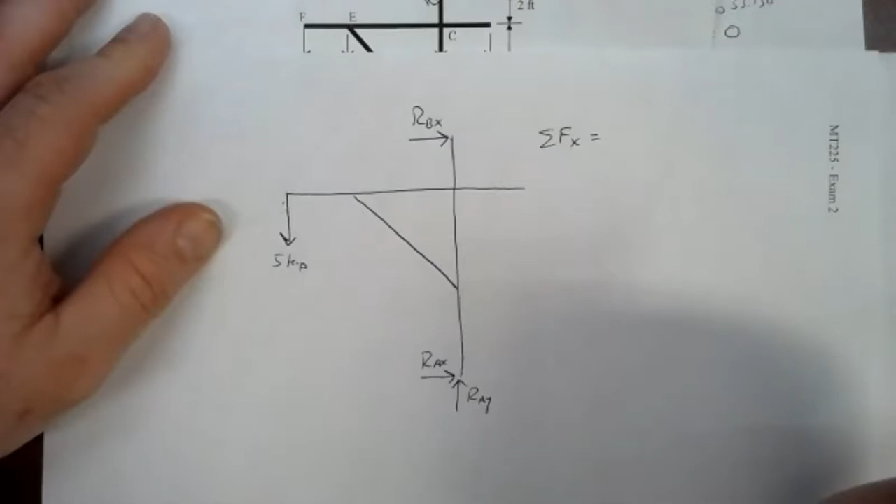So let's do our sum of forces in the x direction, sum of forces in the y direction, and sum of moments about a point. In the x direction, we've got a positive RBX and a positive RAX. Nothing else.

In the y direction, we've got a positive RAY and a negative 5 kips. Well, that is something we can solve right away. RAY is 5 kips. So RAY does push up with 5 kips of force to counteract the 5 kips down. So RAY is 5 kips.

And then we need our pivot point. We need a moment about the pivot point. I'll pick joint A for that. So we'll do our sum of moments about joint A. That's going to knock out RAX and RAY, but RBX is going to have a moment, and the 5 kip force is going to have a moment.

For RBX, we need an arm. We need the distance from the pivot point to RBX. And if we go back to our original drawing here, we've got 6 feet plus 8 feet plus 2 feet. 2 plus 8 is 10, plus another 6, 16. And if we're pinned at A and pushing to the right at B, that's clockwise rotation. Clockwise rotations are negative.

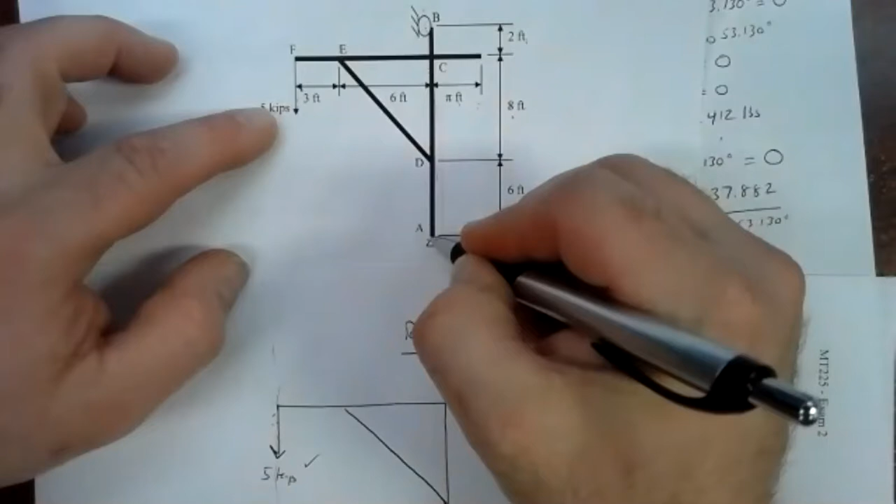So we have 9 times 5. If we're pinned at A and pulling down at F, it's counterclockwise rotation. So it's positive.

So we can clean that up a little bit. We've got negative 16 RBX plus 45 equals 0. Subtract 45 from both sides. Would help if I was on the screen. There we go. So subtract 45 from both sides. Divide both sides by negative 16. And we get 2.8125.

And this one's in kips. So RBX came out positive, so we know our direction's right, and its value is 2.8125 kips.

We can go to the x direction equation and figure out our AX now. Our BX is 2.8125 plus RAX equals 0. If we subtract 2.8125 from both sides, we have RAX is negative 2.8125 kips. So RAX came out negative, which means our assumed direction is wrong. RAX has to be to the left, not to the right.

So there's our external problem. So we could go back to our original picture here and kind of sketch that in. Our BX was 2.8125 kips. Our AX was in the opposite direction, 2.8125 kips. And RAY was 5 kips up. So that'll help us out with our free body diagram for member AB.

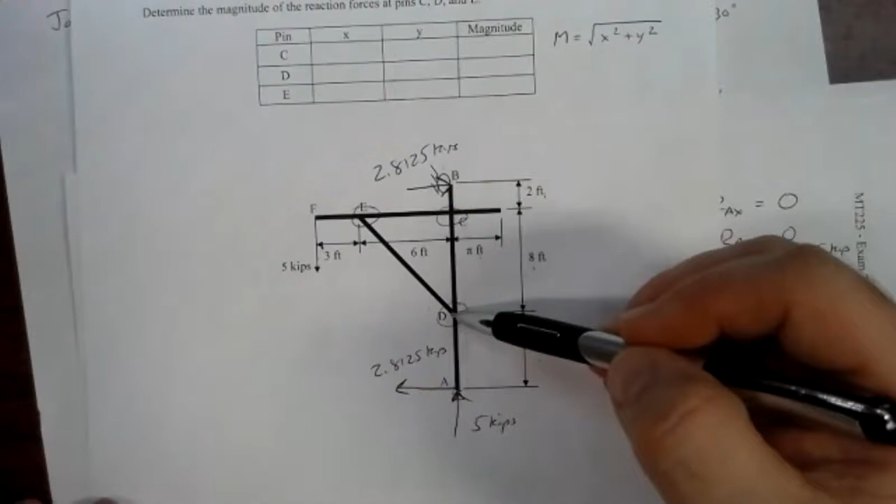Now, to go any further, to figure out what's going on at these 3 internal joints in the problem, we have to blow the structure up. We have to separate it into not one structure with one free body diagram, but 3 members with 3 free body diagrams. Remember, we can only expose forces when we draw the free body diagram of something that force acts on. When we're dealing with the external problem, those forces at C, D, and E are internal forces. They're not external. These methods that we use to solve for equilibrium forces only work with external forces. So the only way to make an internal force into an external force is to break the structure apart.

On paper, of course. It's the same thing we do in method of sections. When we cut through a member, we're turning an internal force into an external one so we can analyze it. So we need to blow this structure up a bit.

And I've already decided I only want to work with the horizontal and vertical members. Those will give me enough information to fill in this table. So those are the only ones I'm going to draw. If you want to see drawing out all of them, we did a problem very similar to this when we first started frames. So I would go to the YouTube channel for that and take a look at those. But here we're only going to need the horizontal and vertical ones.

So there's the vertical member, AB. We have a force over here at 2.8125 kips. We have a force over here, 2.8125 kips. We also have that force up of 5 kips. But now we've got two internal forces.

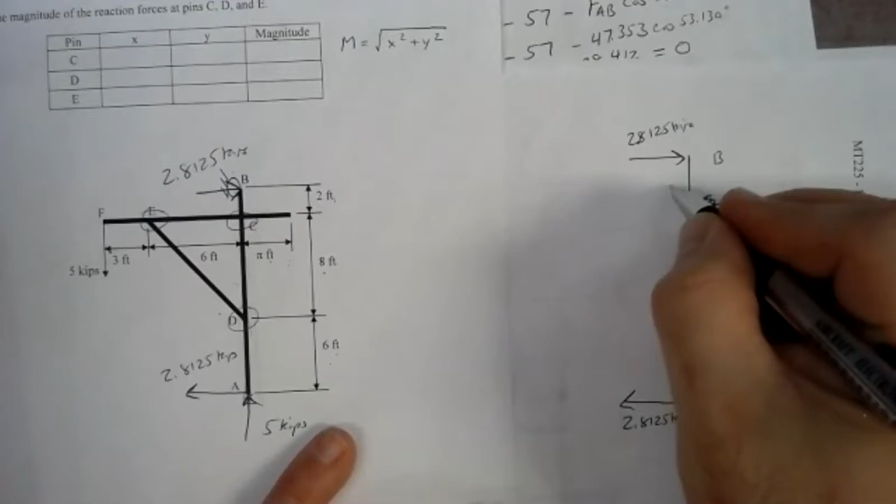When we break this structure out of the truss or frame, we expose the forces at D and C. Now both D and C are pins, and as a pin support, we have two reactions, just like the pin support at A had two reactions. But we don't know anything about what those are, so we just have to guess. I'm going to call the two reaction forces here at D, RDX and RDY, and I'm going to do the same thing over here at C: RCX and RCY.

The first time I draw a free body diagram that involves a joint, the first time I use that joint, I always assume the directions to be positive. That's going to be important here later when we draw the free body diagram for member CF, because we've already made some assumptions about joint C.

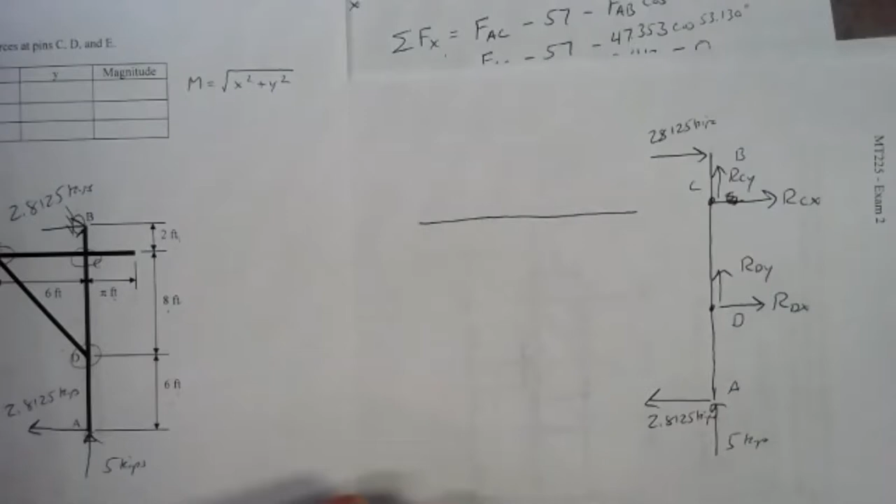All right, so let's draw our free body diagram for member CF. We'll draw that over here next to it, as a separate structure, separate free body diagram, but nearby so that we can compare things. We've got that 5 kip force over here, and we've got joint E and joint C. Now joint E I've never used before, so I'm going to assume positive directions here: FEX and FEY. But joint C, I've already made some assumptions about.

Where these two frame members join together, we've got to have equal but opposite forces. The force experienced by member CF is going to be equal and opposite to the force experienced by member AB. That's the whole point behind equal and opposite forces—one body feels the opposite of what the other body feels. And we have to take that into account in the free body diagram. So if I'm going to use these same symbols, RCX and RCY, I've got to make the opposite assumptions: RCX is going to be to the left, and RCY is going to be down. That ensures that any equations or information we get from one free body diagram, we'll be able to move over to the other without worrying about signs. We're taking care of the sign issues right here by making sure that the assumed directions for the forces are equal symbols, equal values, but opposite directions. That's the one trick in doing a frame problem and setting it up: you've got to make sure that at corresponding joints, you've assumed opposite directions for the forces.

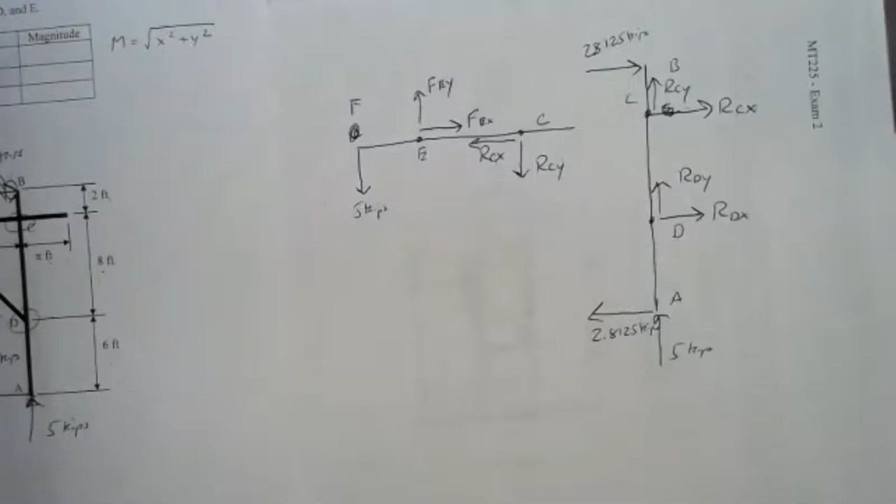And that was joint F there. Okay, I was just going to ask—sorry, you got that? Yep, it was throwing me right off. Thanks, sorry about that. All right, so let's go ahead and figure these out here.

Let's deal with the vertical member first. We've got sum of forces in the x direction: a plus 2.8125 kips and a negative 2.8125 kips. Those of you who have done the homework have seen that come up a couple of times—those cancel each other out. So I'm not even going to bother writing them in my x direction equation, since I've got positive and negative of the same number. What sticks around is RDX positive and RCX positive, and to be in equilibrium, that sum has to be equal to 0.

I've got my sum of forces in the y direction. I've got 5 kips—I've got to keep that one in there, there's no other 5 kips pushing down to oppose me. I've got a positive RDY and a positive RCY, and that equals 0.

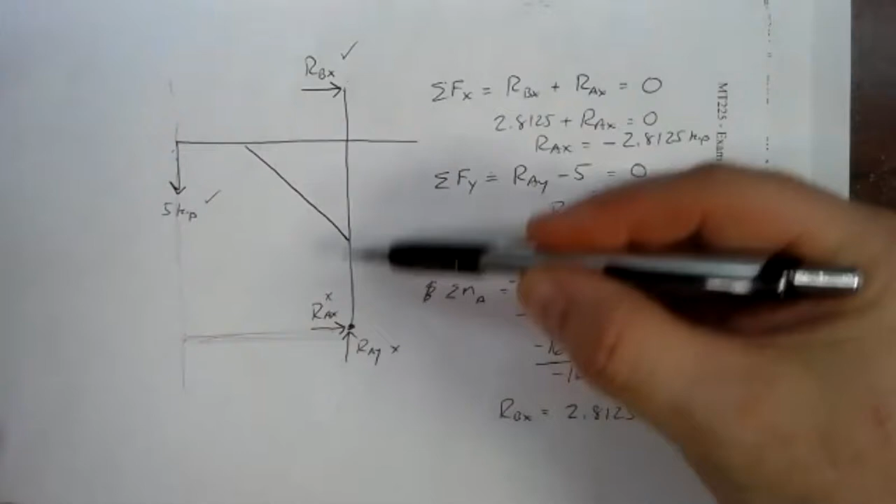Hey Tom, yeah go ahead. I'm sorry, before you go any further, how did those two cancel out? I'm missing something. Let me go to a separate sheet here. So if we do our sum of forces in the x direction, we've got 2.8125 to the right, so that would go in as positive 2.8125. No, I understand that, I'm missing where we got the top one—what is that, on B? This force up here, that was from the external problem, from here, where we had our free body diagram for the whole structure. Oh okay, yep, so that's one of the external forces—that was one of our reaction forces, the force from the roller. All right, all right, sorry. No worries.

So our y direction equation's there. Now we need our moment equation.

It's always going to be best in these problems to pick one of your unknown joints. If you pick A, like we traditionally do, that's fine. It can work out, but you're only going to be knocking out forces you know, plus a couple you don't. You're still going to have two unknown forces with moments, and you can always find a pivot point where you'll knock out everything except one unknown force.

So if I look at the drawing here, sometimes the drawing gives you ideas about where to take those pivot points. I think I'm going to pick joint C for my pivot point on this one. So I'll take my sum of moments about joint C.

If I'm pivoting at joint C, that's going to knock out RCX and RCY. It's also going to knock out RDY because RDY's line of action goes straight through C, no arm. It's also going to knock out this 5 kip force. Basically, any vertical force is knocked out, and any other force at joint C.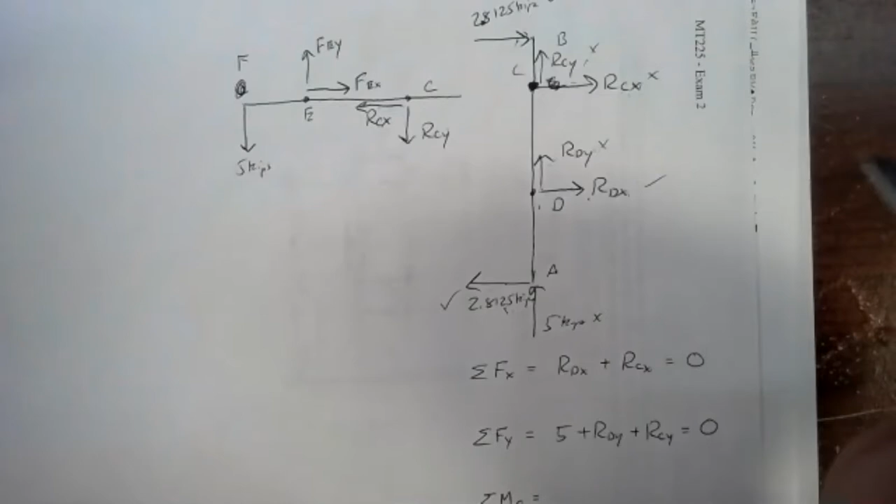So that means I'm going to have 3 terms in my moment equation: one from that 2.8125 kips up at the top, one from this 2.8125 kips down at the bottom, and then one from RDX. Those are the only 3 that I'm going to have a moment from. No moment from RDY or RCY or the 5 kips because those all shoot right through C, and RCX also goes through C. So 3 terms.

The 2.8125 kips up at the top, according to the drawing, is 2 feet away. So I have 2 times 2.8125. If we're pinned at C and we push to the right at the top, that'd be a clockwise moment, and clockwise moments are negative.

D is 8 feet below C. So the arm for RDX is 8. And if we're pinned at C and we push to the right at D, that'd be a counterclockwise moment. Counterclockwise moments are positive.

And then way down at the bottom, we've got this 2.8125 kips at A to the left. That looks like 14 feet away, 8 feet plus 6 feet. So we've got 14 feet times 2.8125. And if we're pinned at C and we push to the left at A, that's a clockwise moment. Clockwise moments are negative.

So there's our moment equation. If we clean that up a little bit: negative 2 times 2.8125, and we've got negative 14 times 2.8125. That gives us a total of 45.

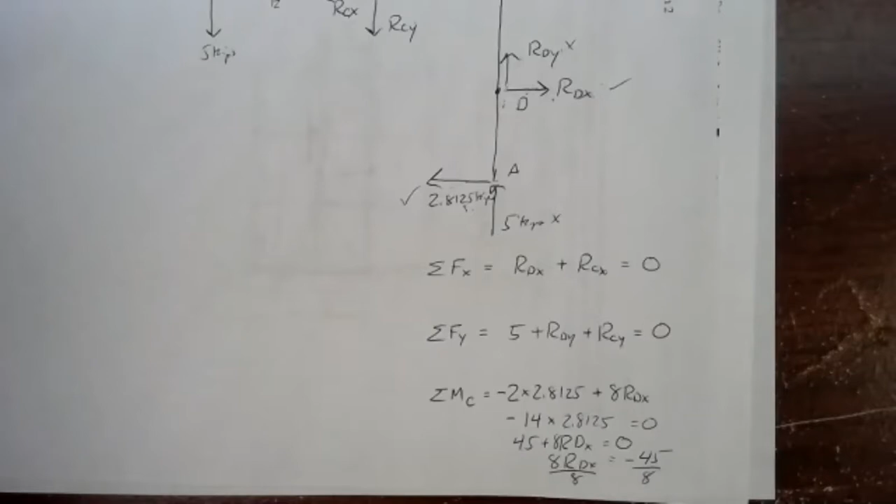So we have 45 plus 8RDX equals 0. Subtract 45 from both sides. We have 8RDX is negative 45. And divide both sides by 8. And RDX comes out to be negative 5.625.

So we can plug that into our table here, including the sign in this case. In this case, we're looking at components. And since in the end we're looking for magnitudes, we're not looking at the actual load, the magnitude is the load. So when we figure out that 5.625 kips, we can go right to the table and plug that in. So that's our DX. We have negative 5.625 kips.

So we've got something in the table. So we've got our RDX value. I'll try to leave that on here. There we go. Now that we know RDX, we can carry that up into our x direction equation.

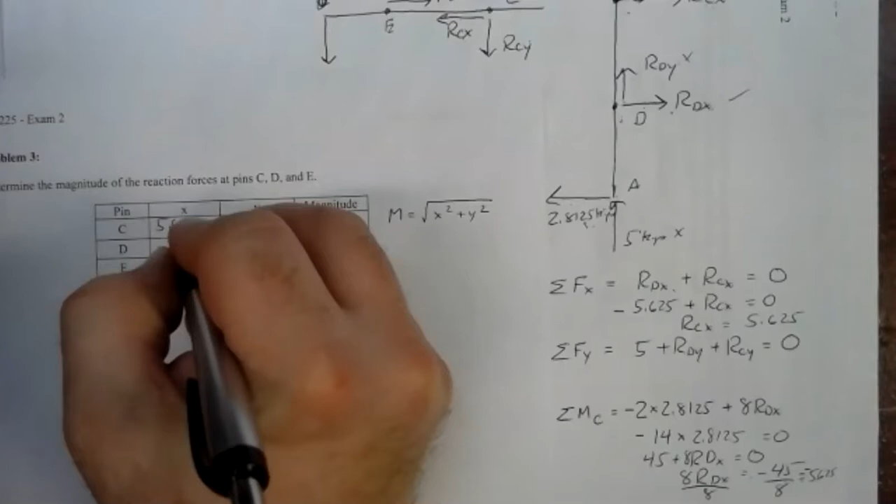We've got negative 5.625 plus our CX equals 0. If we add 5.625 to both sides, we get our CX equals 5.625 kips. So we've got another one we can fill in. Our CX is 5.625 kips.

And that kind of makes sense that those two should oppose each other. The 2.8125 and the other 2.8125, those cancel out. So the x direction forces here also have to cancel out. There are only two of them. So one's got to be equal and opposite to the other.

And that works out. Unfortunately here, we can't do a whole heck of a lot with our y direction equation. That tends to happen when we have more unknowns than equations. This non-concurrent force system gave us 3 equations, but we've got 4 unknowns: our CX and CY, our DX and DY. But we ended up in basically the best possible situation where we got 2 numbers and an equation out of that. When you've got 4 unknowns, that's about the best you can hope for, is 2 numbers and 1 equation.

We can clean the equation up just a little bit. We can say RDY plus RCY equals negative 5. But I'm going to take that, move it over here, put it in my equation bank, so that maybe later when I have some more information, I can use it.

Hey Tom, yeah go ahead. How did you get a negative RDX? Let's see here. Oh, look at that. Because I lost a sign, that's why. Okay, I thought it was me, and I said nope. I don't know how we did it.

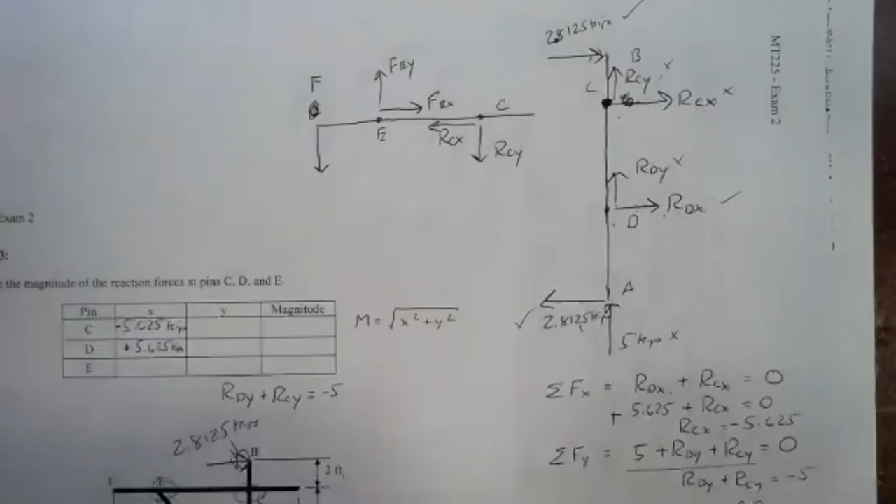Because we'd be going for a magnitude, doesn't matter anyway, and the signs won't matter. But it's not great practice, so thank you for catching me on that. I totally did that on purpose so you'd find it. But yeah. Very sneaky, that's correct, yes good.

All right, any other questions on the vertical member here? The rest of it should go relatively quickly, so let's take a look at the horizontal member.

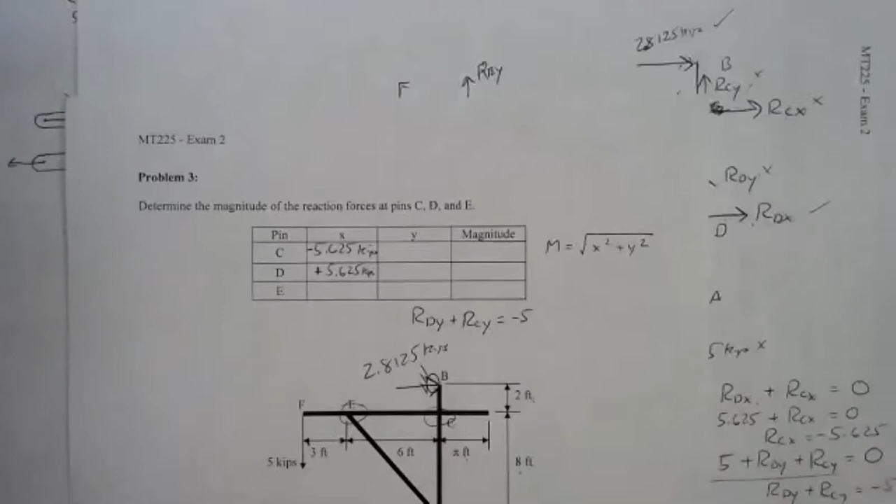Now that horizontal member has 4 unknowns, but at the very least we've got 1 additional piece of information. We're going to have 4 equations because we've got this extra equation I just put in my equation bank. And why we had to draw this equal and opposite is so that we'll be able to use this equation. If we didn't draw the arrows in opposite directions, then we'd have to worry about switching the signs around when we jump from one to the other, and that would be a big mess. So drawing corresponding joints with equal but opposite forces makes it easier to import information from one solution to another.

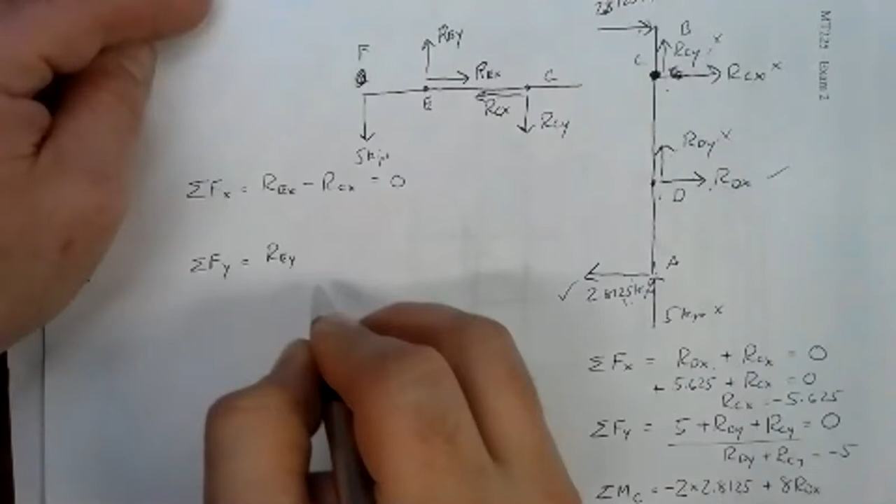So let's draw the equations for the horizontal member. We have our sum of forces in the x direction. We've got a positive REX and a negative RCX. Nothing else in the X direction. In the Y direction, we've got a positive REY, we've got a negative RCY, and we've got a negative 5 kips.

Now, so far, neither of those are ones we can solve directly. Then we've got our moment equation. And again, good idea to pick a pivot point that's going to knock out things that you don't know. Here, the joint I know the least about is E. I do know some information about C. In fact, from our table, we already know what RCX is, so we've already got a piece of information we can use. I'd rather knock out things I don't know and make, hopefully, the solution for things I am trying to find a little simpler. If I pick E as my pivot point, it's going to knock out REX and REY. It's also going to knock out RCX since it shoots right through E. But RCY will have a moment, and the 5 kip force will have a moment.

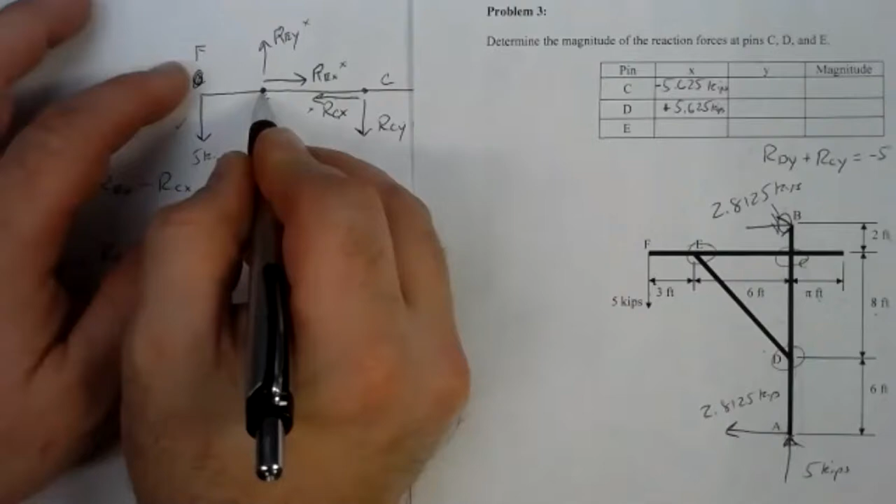Now, according to our drawing, bring that back over here. The arm for, if we're using E as the pivot point, the arm for this 5 kip force is 3 feet. So we'll have 3 times 5. If we're pivoting at E and pulling down at F, that's a counterclockwise moment, so that's positive.

C is 6 feet away, so RCY's arm is 6 feet. If we're pinning at E and pulling down at C, that would be a clockwise moment, and clockwise moments are negative. So there's our moment equation. Not too bad, we've got 15 minus 6 RCY equals 0. If we subtract 15 from both sides, we'll have negative 6 RCY equals negative 15. And divide both sides by negative 6, and RCY is a positive 2.5.

So there's another one we can fill into the table. RCY is 2.5 kips.

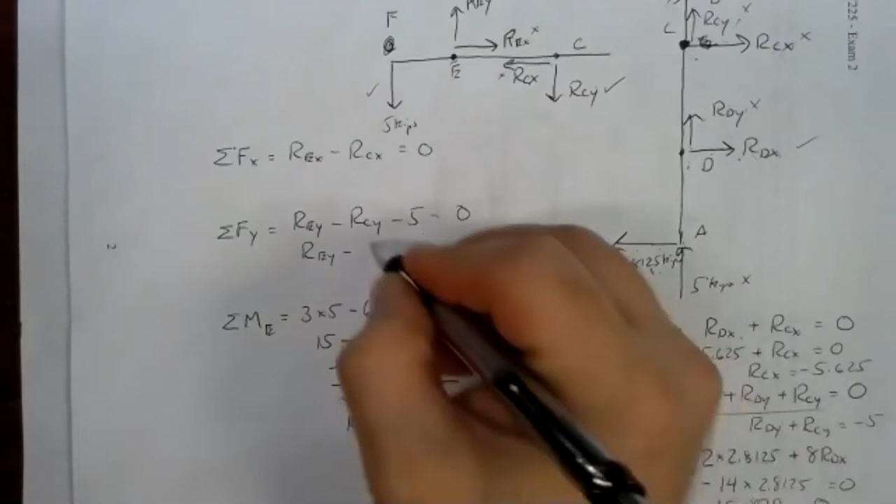Now, knowing RCY, we can figure out our REY, because we can go and plug that in. REY minus 2.5 minus 5 equals 0. So REY minus 7.5 equals 0, and REY is 7.5. So we got a value for REY, positive 7.5. So we can fill in that in the table.

Now for our top equation here, REX minus RCX equals 0, but we already know what RCX is. RCX is negative 5.625. Now be careful when plugging in negative numbers. Remember, you're just replacing the symbol. You've got minus whatever the value of RCX is. The value of RCX is negative 5.625, so here you're subtracting a negative. Remember that old keep-change rule, it's the same as adding. So REX, if you work through the algebra on that, subtract the 5.625 from both sides, we get negative 5.625 kips. So REX is negative 5.625.

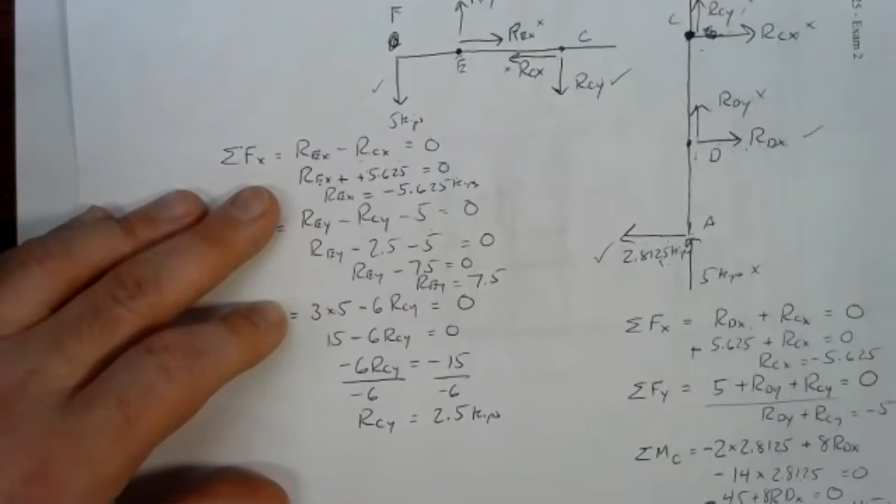And then we've just got joint D reaction in the Y direction to deal with. None of our equations involve that, but we've still got one equation left in our equation bank: RDY plus RCY equals negative 5. We know RCY is positive 2.5, so RDY plus 2.5 equals negative 5. Subtracting 2.5 from both sides, RDY is negative 7.5 kips.

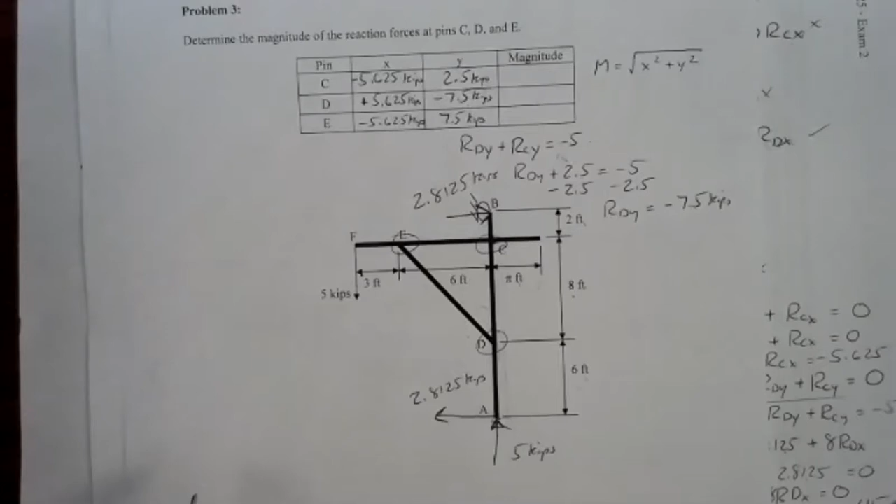Now it's not a bad idea to look at your answers and do at least one quick sanity check. The check I would do is looking at member DE. Member DE looks a lot like a truss member. Remember, with trusses you can only exert forces at the ends of the members. Member AB isn't a truss member because it's got forces in the middle of it—actually two forces. Same with member CF. But member DE is a plain old truss member.

And when you've got a plain old truss member, we know something about that: whatever that member is, the forces at the end of it need to be equal and opposite in direction. They line up with the member. That doesn't happen when you put forces in the middle. But when you only load a member at the ends, we have that same old two-force member, the plain old truss member.

When you break that up into X and Y components, it means the values you have for your X and Y components, when dealing with a two-force member, should be the same magnitude but opposite directions. At one end it's down and to the right, at the other end up and to the left, or vice versa—up and to the right at one end, down and to the left at the other.

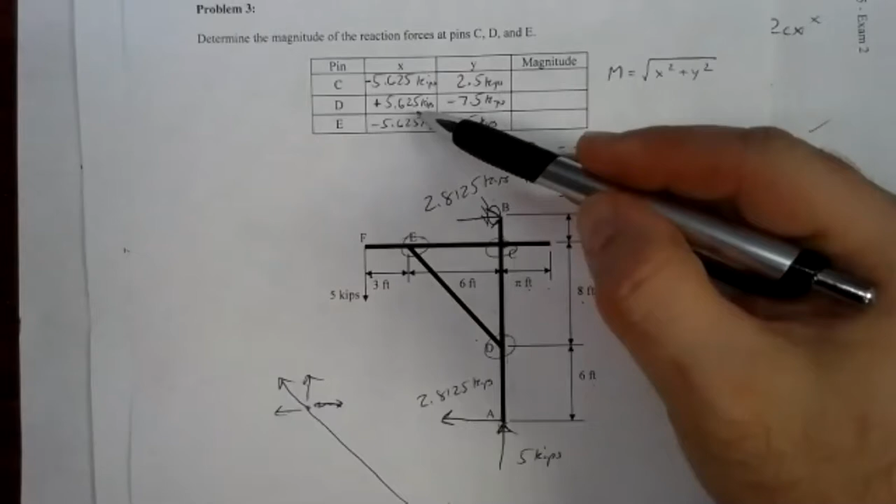Look at our answers here for D and E—same numbers, but opposite signs. That's telling us we're dealing with a two-force member. The magnitude will come out the same for both ends. The only time you get the same magnitude at both ends of a member is when it's a plain old two-force member, just like our regular truss members.

So that's a quick little check, and something that's come up in a number of the frame problems we've gone over. If you review any of these in preparing for our exam on Wednesday, take a look at that. Notice the forces end up being the same numbers at the ends, just different signs, whenever you have no other forces on the member except what's at the ends. Now if I hung another force on it, that would change it completely—it would no longer have that behavior at the ends.

So let's find our magnitudes and close this problem out. Notice this one didn't have any restriction on how many sig figs to put in, so anything reasonable will be sufficient.

So we've got 5.625, we'll square that. We've got 2.5, we'll square that. Add those together and take the square root—there I get 6.1556 kips. Then 5.625 squared plus 7.5 squared, square root there, we get 9.375 kips. And we'll get the same there.

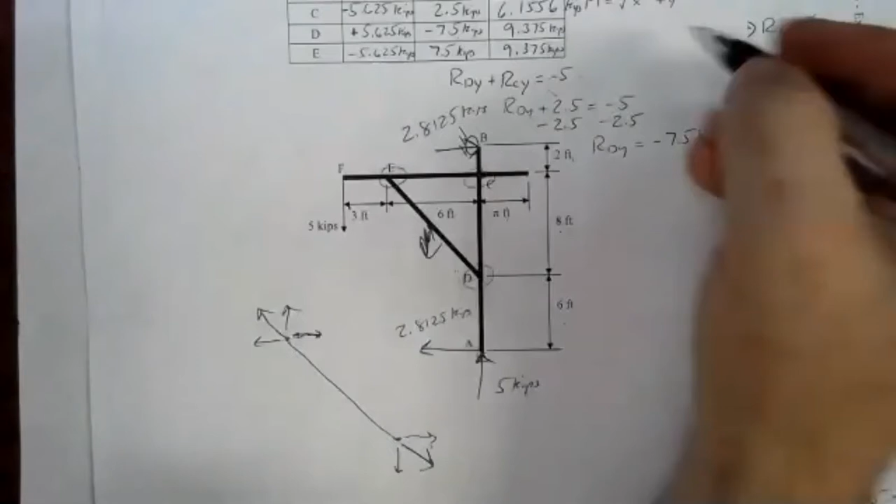Again, my piece of advice on figuring out your magnitudes: ignore the signs, don't even bother keying them into your calculator. You're only asking for trouble if you key them in—some will burn you pretty badly if you forget some parentheses. It'll still dutifully calculate it, but it'll give you, in the best case, a wrong answer, and in the worst case, no number at all. So just ignore the signs—they don't matter when finding your magnitude. Your magnitude should always be positive. And don't forget those units.

Any questions on any other problems?

Let's see, who do we still have here? Oh, everyone's still on board. All right.